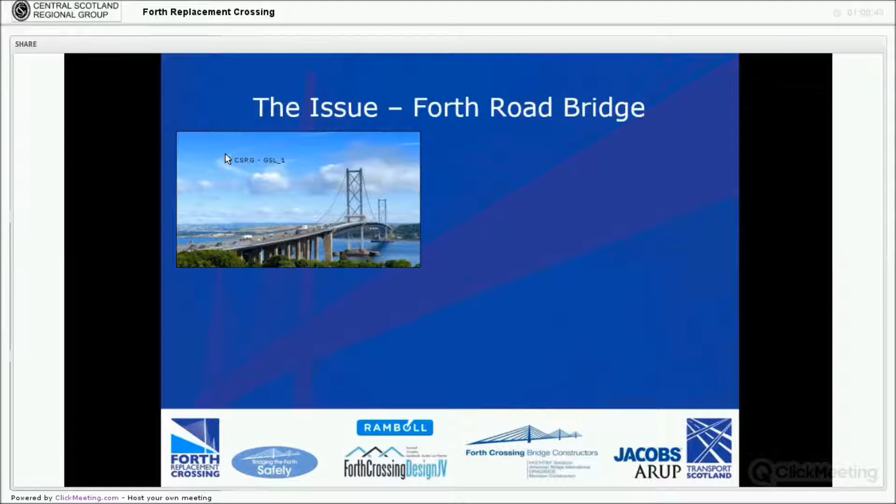To start at the beginning, the existing Forth Road Bridge is 50 years old this year, and there are a lot of celebrations planned. It is currently carrying something like 5 or 6 times the level of traffic that it did when it opened in 1964, and every year the maintenance burden increases.

On top of that, in 2004 to 2005, inspections of the main suspension cables revealed corrosion, leading to a strength loss of up to 10% in those cables. The more pessimistic predictions looked for potential weight restrictions by 2014 and possible closure by 2019. I'm pleased to say that work since then has extended these timescales somewhat, but that lost 10% of strength is never going to be regained.

So, with this situation, the Scottish Government appointed Transport Scotland to look at the feasibility of a replacement crossing. We looked at 5 crossing corridors along the length of the Firth of Forth from Grangemouth to Inverkeithing, and 4 different structure types, both bridges and tunnels. But the preferred option, accepted by the Scottish ministers in December 2007, was for a cable-stayed bridge immediately to the west of the existing Forth Road Bridge. And by the way, the government wants it by the end of 2016, so a very tight timescale.

At this point, Transport Scotland appointed Jacobs Arup to be our technical consultants to bring the scheme through the scheme development phase.

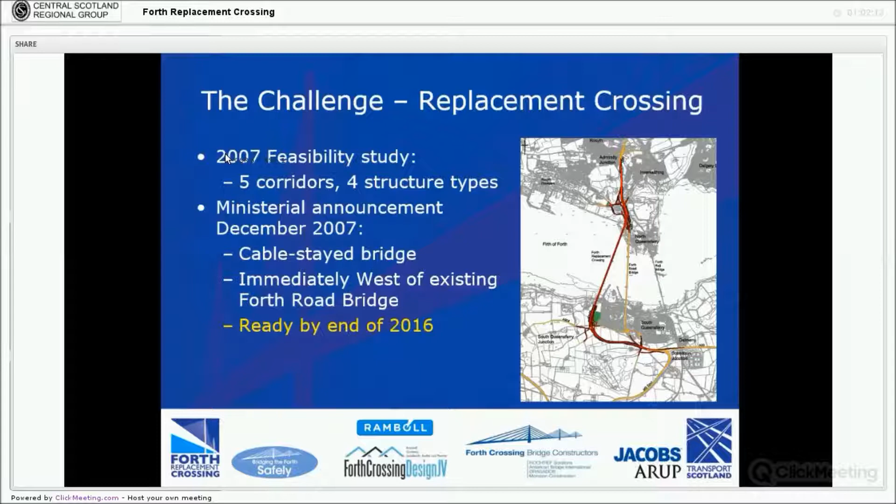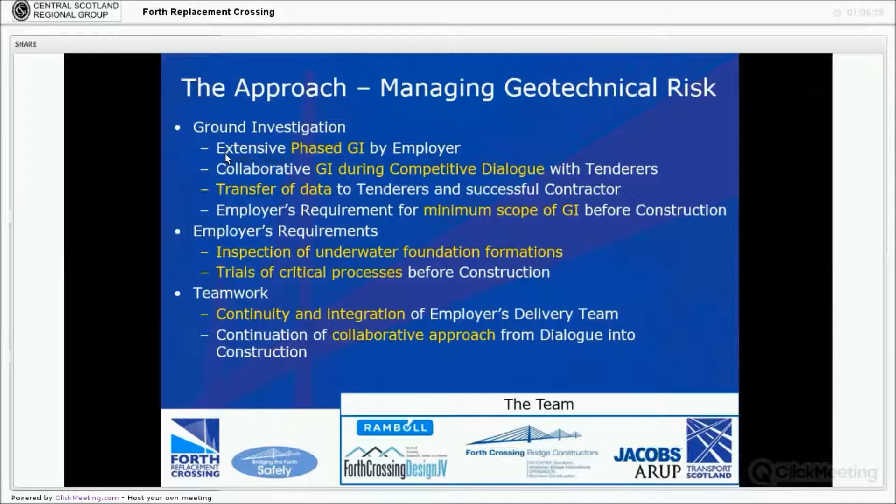So what is the task ahead of the project team? They have to deliver what will be called, when it's opened, the Queensferry Crossing. It's over 2.6 kilometres long, of which over 2 kilometres is cable-stayed bridge.

Some of the challenges facing the construction team are that the spans cross 2 busy shipping channels to Grangemouth and Rosyth. The deepest water at foundation locations is at South Tower, where the water is 20 metres deep. The deepest rock head, also at South Tower, is 40 metres below Ordnance Datum. The tidal range in the Forth is 6 metres, and the tidal current at Central Tower, in the middle here, is 2 metres per second, which is a fair trot.

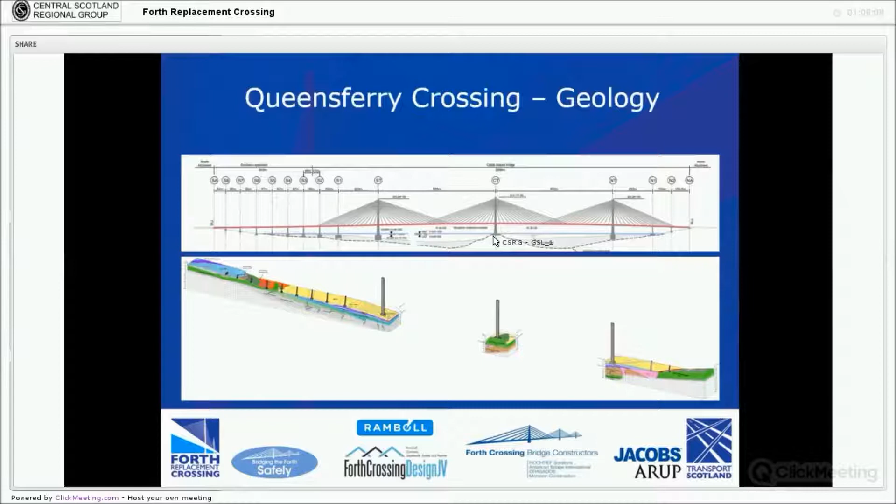I won't go into the geology, John will be describing that shortly. Suffice to say that a combination of the geometry of the bridge and the geology has resulted in a number of approaches to the construction of the foundations.

All the foundations are spread footings onto rock, but they've had to be tackled in different ways. We'll get some more detail about some of these later on in the presentation, but I'll just introduce some of the key

locations for you. The yellow box surrounds the Central Tower foundation, which sits on a tidal island called Beamer Rock between the 2 shipping channels. Flanking that are the north and south towers, plus an additional foundation at Pier S1, which are formed from caissons, large steel cylinders filled with underwater concrete.

The remaining marine foundations are relatively conventional cofferdams, and on land it's relatively straightforward. I'd draw your attention to the column on the right-hand side - 3 of these foundation solutions require the rock formation exposed during construction to be inspected in the wet, underwater. We'll see later on how the contractor has tackled this.

I think at that point, I'll hand over to John to describe the ground investigations on the geology. Thank you, Paul. Okay, move on.

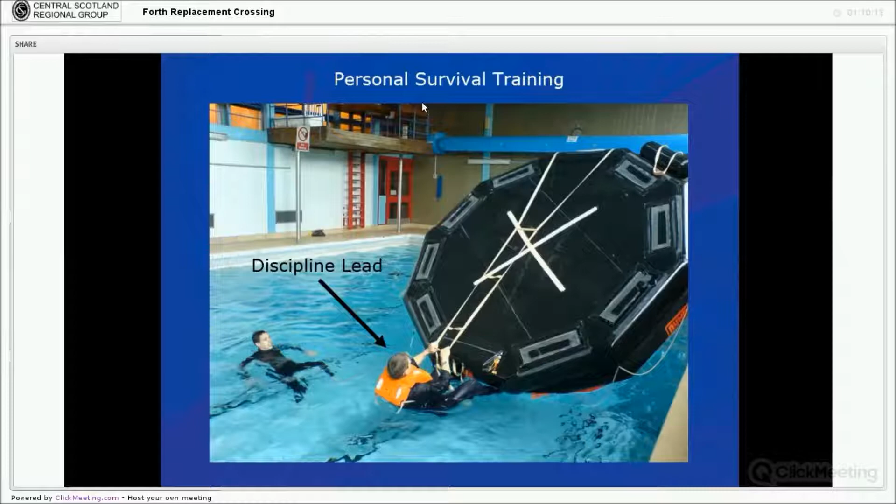The next interesting thing we found was we could swap our site Land Rovers for open-top speedboats. We thought this was quite a good idea, but of course, it being Scotland, it wasn't a good idea on every day.

Paul mentioned there's a 6-metre tidal range here, so in this sort of situation you could find a 9-metre ladder climb to try and access that platform. There are means and ways of getting around such difficult things, but it's a whole subject in itself. It's worth thinking about access when undertaking this sort of work.

One other thing we found was sometimes the simple things trip you up in life. On this platform, the contractor put land-based investigation tools - a cable percussive rig and a rotary rig, operated by standard drilling crews used to measuring borehole depths below ground level. But there's no ground here. So the contractor surveyed the level of the deck and gave them an offset to take off every measurement. It wasn't part of their standard operating procedures, they didn't do it all the time, and as soon as they became distracted or tired, it just went out the window. It was something we had to keep a constant eye on, making sure they were recording the right levels.

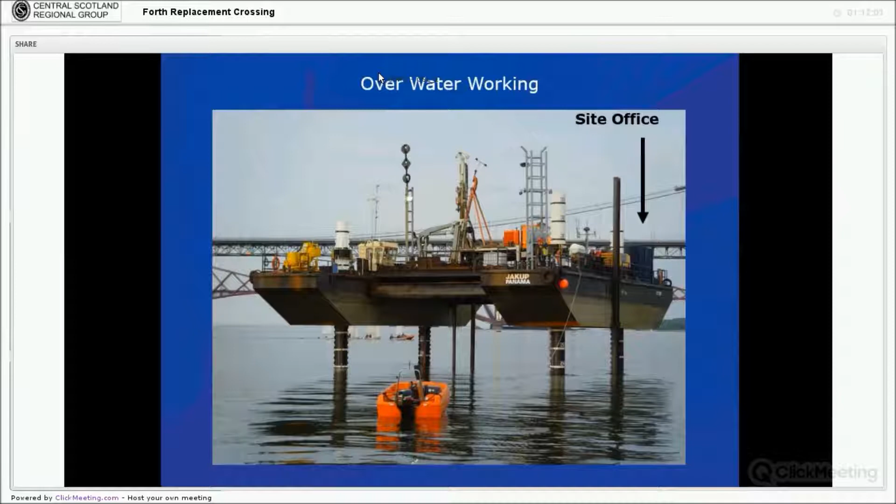As you can see, we've got a cable percussive rig on the left-hand side of this platform, a rotary rig to the right, and all the equipment around about. Again, it's access - it's not possible to get all that equipment on the jack-up when you need it, so it needs to be on before you start. It makes for a very congested workspace, and if you're an engineering geologist or geotechnical engineer trying to supervise, you want to position yourself where you can see what's going on. But it's virtually impossible to find somewhere to stand without being in someone's way at some point.

Again, access restrictions. In the River Forth, we found floating barges and jack-ups struggle to get to shallow water areas, and indeed deep water areas. In shallow areas, you can't float the barge in over it at high tide, so you can't access that area. In very deep areas like the South Tower, you need a jack-up with very long legs, or a floating platform, and keeping that platform steady and stable becomes a whole new problem. At Beamer Rock, we had ground levels at +2 meters OD, just below spring high tide but well above low tide, so there was no option to float a platform in. We had to construct a specially designed platform light enough to lift into place with a multi-cat vessel - an even more constrained and exposed working environment for the drillers.

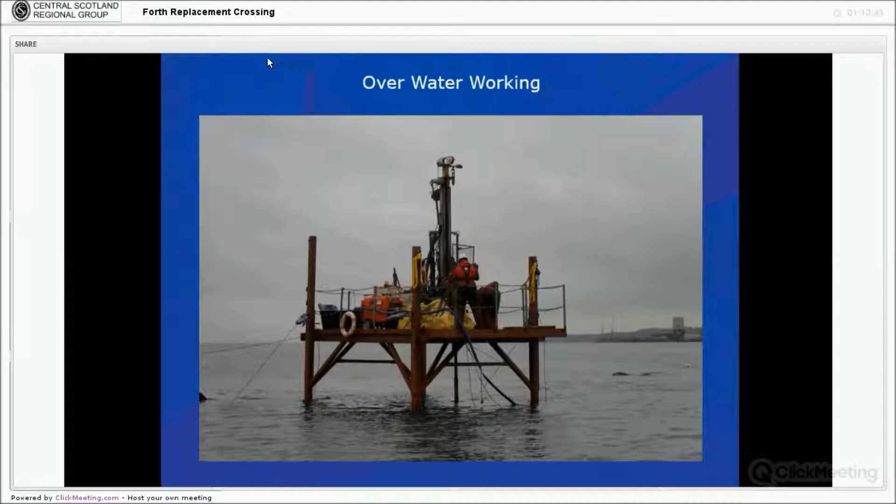Working over water, you're using boats and barges, typically hired in and staffed on a 24-hour basis, so the ground investigation naturally fits into that 24-hour pattern. But it comes with its own challenges. First, lighting was very difficult - you can't have some areas well lit and some in darkness, it's just not safe. So adequate lighting had to be provided, requiring extra generators. It's all a problem.

The next thing was that noise at night was a large issue. Calm sea conditions allowed noise to transfer right across to our local residents, so we had to completely ban cable percussive operations - it was just far too noisy, and even still we were receiving complaints, as Paul will attest to. So we had to address the rotary rig too, and got around that by strapping rubber matting onto anything that moved or vibrated.

Wow, it was sometimes dirty work. Actually, it was quite a clean environment since there's no muddy fields to traipse around in all day. But if the borehole starts throwing up mud, it's so congested it's not really easy to get out of the way of it. You've got to admire this driller for maintaining a positive attitude in this condition.

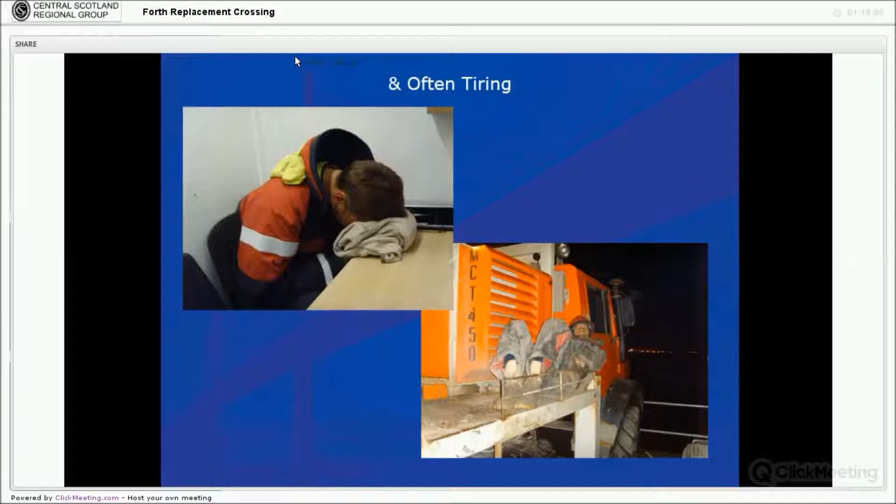Okay, we'll talk a little bit about the geology now.

So we did three phases of ground investigation over three years, and we pulled together some records on the encountered geology. We produced a 3D section to try and represent that, and the next few slides are sections of that zoomed in. The alignment of this section is right along the centre line of the bridge, cutting through the towers and the piers. We've removed any of the foundation details just for clarity.

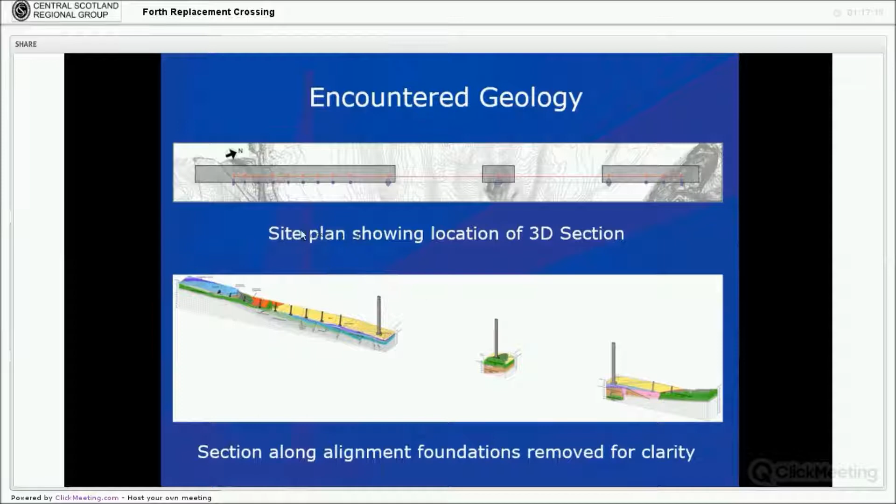Starting on the south side, we can see that we did indeed find the glacial till identified by the light blue colour and the two levels of raised beach deposits. We also found granular fluvial glacial deposits and made ground associated with Port Edgar Barracks, a former naval base. But what we did find was that underneath the south abutment and Pier S8, we didn't have the alkali dolerite subcropping at Rockhead. We actually had Calders member sandstone.

If we move a little further offshore, we can see that this altered dolerite, the alkali dolerite sill, starts to separate into thinner sills. And as it does so, we found that the alkali dolerite became altered. So much so that by the time we get further out into the marine environment, it completely altered to what's known locally as white trap. Iain will be showing some photographs of this rock later on.

The other thing to see here is that we had identified a marker unit between the Calders member and the Hopetown unit, which was the Burdiehouse Limestone. That allowed us to get all of our stratigraphies right. If we had a borehole where we could identify the Burdiehouse Limestone, we knew what was happening with the geology.

The bedrock and all the units are dipping just slightly more than Rockhead towards the north, which meant that we actually found differing formation rocks at every single pier. So we would go from the Calders member sandstone into the Calders member mudstone, then the Burdiehouse Limestone at Pier S4, then the Hopetown mudstone, and then the Hopetown sandstone. So varying geology for every pier. Above the bedrock we have a varying succession of fluvial glacial deposits, glacial till, and a thickness of alluvium, which all increase in depth as we go offshore.

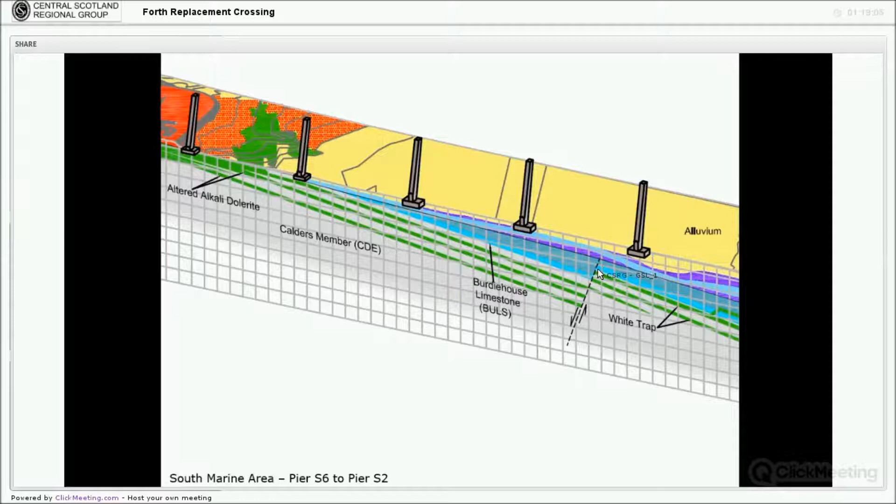However, boreholes here found the rock at around about minus 40 metres OD, and we did a few calculations and worked out that that was adequate. We could form foundations at that depth, and we didn't need to increase the span of the bridge at that point. So we kept the specimen design to a 650 metre crossing, or span.

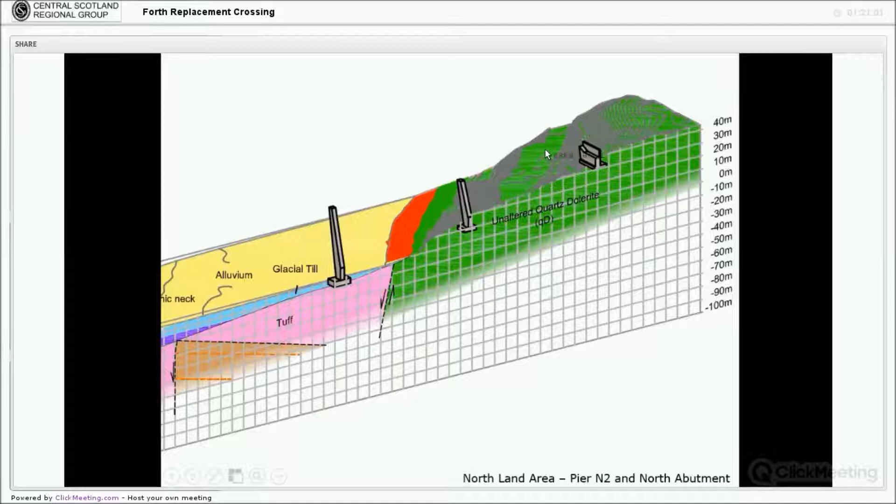When we move on to the North Land, there's a dramatic change in the geology, and we're back into the quartz dolerite sill that we encountered at Central Tower. In 2010, we did also identify a raised beach deposit in this plateau area here. And that's a summary of the geology.

I'll hand over to Iain now. Thank you, John. I'm Iain Bews.

I've been working with Ramboll for about 6.5 years now as a geotechnical engineer, and the last 2.5 of those years I've been fortunate enough to be working on the Queensferry Crossing project, which is obviously an incredible project to work on. My role has been on the designer site representative team as an engineering geologist.

The designer site representatives are comprised of scientists and engineers from various disciplines, and our role is to be the designer's eyes on site. We communicate design issues between the designer and the contractor. We work closely with the contractor in order to help develop construction and inspection methodologies.

We particularly get involved with design issues with temporary works, because we have to be sure that the temporary works are particularly complicated on a project like this. Obviously, large spread footings on bedrock may be complicated on land, but in a marine environment they certainly are complicated, and actually trying to get that foundation in place where it needs to be and ensure that the rock is cleaned and ready to go takes some doing.

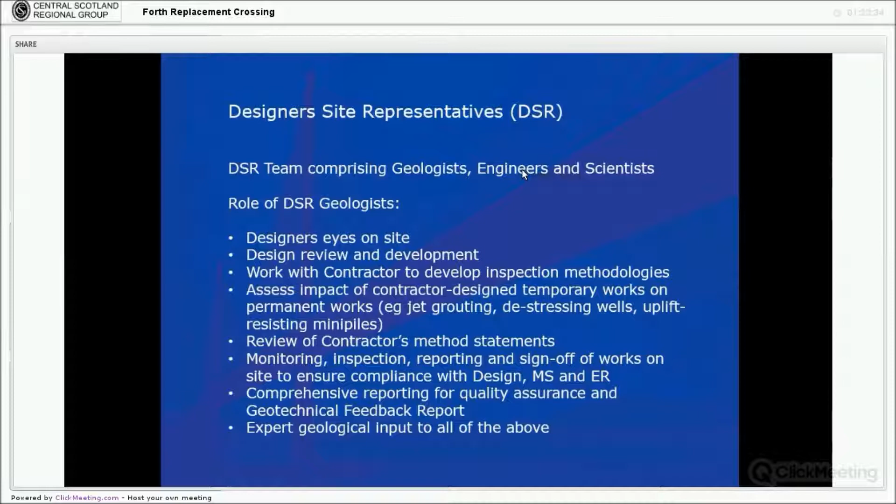I'm going to talk a little bit about the pre-construction marine ground investigation, following on from the earlier talk about the various phases. This was the final phase.

Once the FCBC had been awarded the contract, they realised they needed to do a little bit more ground investigation, just to make sure there weren't any gaps, make sure that we had enough information to verify the design parameters, confirm the rockhead gradients, and of course also to satisfy the employer's requirements.

In particular, there's an employer's requirement that every foundation had to have an investigation point in opposing quadrants of the foundation area, and that those investigation points had to be a minimum of 2 times the foundation width below the underside of the foundation, as per the Eurocode 7 guidance.

So in the case of the South Tower, for example, which is a 30-metre diameter foundation, 40 metres below sea level, that means we have to go 60 metres below that. Hence, we were going down to depths of 100 metres, minus 100 metres below ordnance datum. So those boreholes weren't insignificant, and there was a lot of core to be logged.

It was 24-hour working over 7 days, the same as the other investigations. It took about 7 weeks altogether. There was a fair bit of downtime due to some atrocious weather, as it was conducted between a November to January period 2 years ago, as these GIs often seem to be, and we had some fun out there.

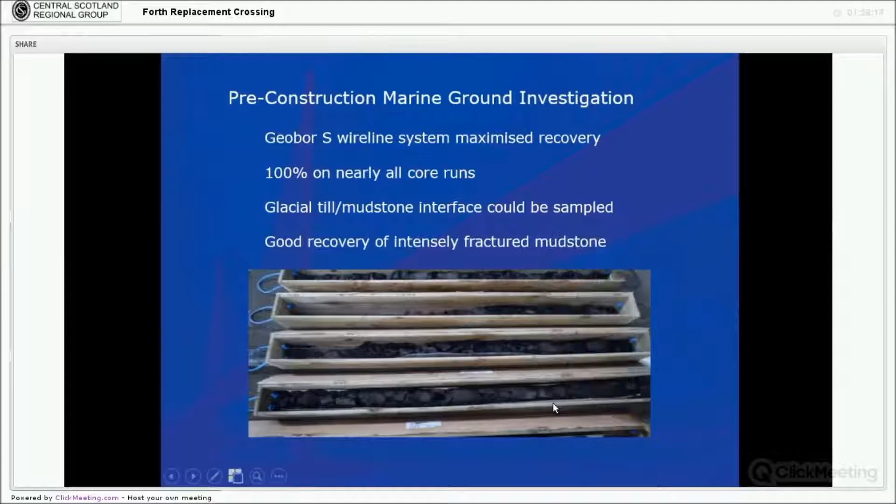Thank you, John. So here's an example of some intensely fractured mudstone. You can see in this core on the right, you can actually pick out the structure of the rock, whereas without Geobor S it would have been almost impossible to recover that. It would have ended up just as a load of loose gravel in a box.

I should also mention that one of the reasons for the marine GI in the pre-construction phase was to get additional information about the fractures, because the fracture geometry obviously has a large influence on the rock mass strength. So rather than just relying on the predominantly UCS and point load tests that had previously been conducted, we did some tests on natural discontinuities, so we were able to ascertain a shear strength along natural discontinuities, which was helpful to verify the assumptions in the design model.

Hi, so as I was introduced earlier, I'm one of the engineering geologists from the design joint venture. One of our main roles on the project was to carry out formation inspection, and it was essential for us to check that the founding rock, once it had been excavated and uncovered as part of the construction process, was consistent with the expectations of the design. So there are a number of key parameters that we had to check, related to the rock bearing strength requirements - we had to check the rock type, the rock strength, the discontinuity spacing and orientation, the condition of those discontinuities, and also check that the overall formation surface roughness was consistent with the design.

So was it rough, was it smooth, was it peaky, was it flat? There's lots of things for us to check. We also had to check that the prepared formation surface was clean - was it free of loose material, was it free of soft material? Because all these things would influence the performance of the foundation. And ultimately, once we carried out our formation inspection, we were able to sign off that formation. We carried out this at each of the foundations.

So, as previously mentioned, we carried out the formation inspection at the locations where the foundations were constructed in the dry, and also where the foundations were constructed in the wet. This just shows you again the locations of each of the foundations.

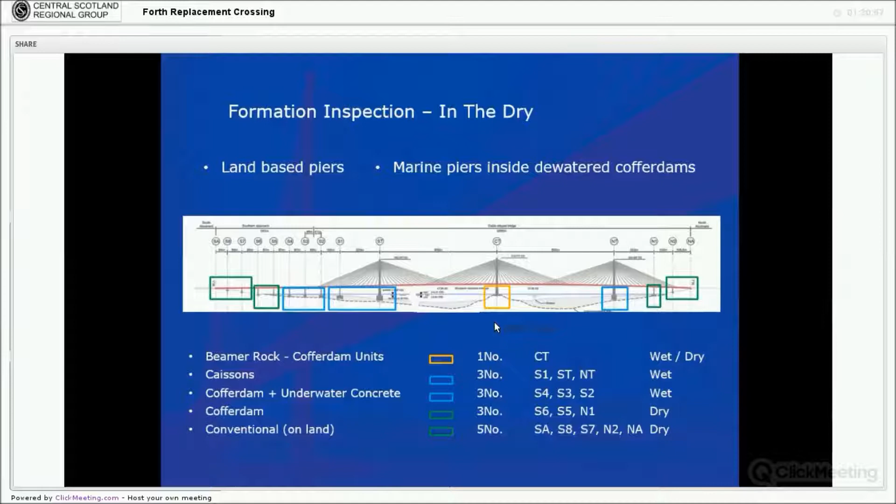You ended up with a very good, clean rock surface we were then able to inspect. Formation inspection in the dry was relatively straightforward. We had full access to the rock surface and were able to carry out direct visual inspection, as well as a scanline survey.

This was a really effective, systematic way of gathering data regarding the actual condition of the founding rock. We laid out a number of inspection lines across the rock surface, and along each line, for every discontinuity that crossed it, we assessed the spacing and condition of those discontinuities.

So were they joints or bedding discontinuities? We also looked at joint infill and general features of the joint, and took orientation data of the joints, comparing all the observations we made to those expected by the design.

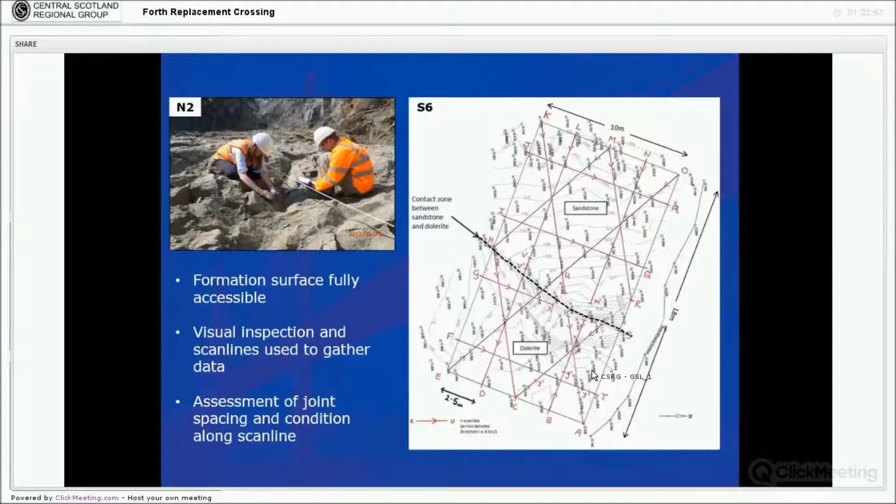And back to Iain for some information about Central Tower and the trials carried out.

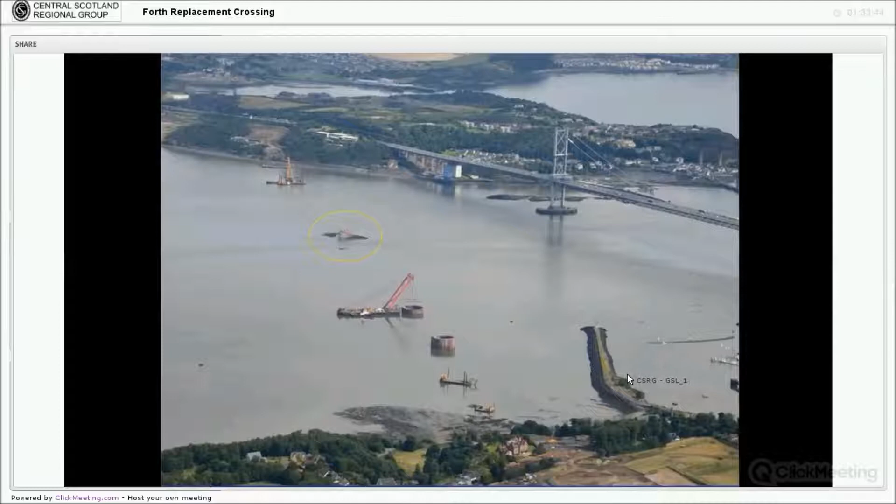There you could see the location of the Central Tower on the Beamer Rock, which you've already seen numerous diagrams showing where the Beamer Rock is in the centre of the Forth. And there it is in all its glory before it was blasted and excavated out, which I'll describe in a minute. That's the lighthouse, which obviously was dismantled.

The reason for the trench is that L-shaped cofferdam units were prefabricated close by in Rosyth and were moved into place by crane to form a watertight cofferdam so that the main foundation could be constructed in the dry.

Now, the majority of our geological involvement was in developing the methodology for inspecting those edges, because they could only be inspected underwater, since it was in subtidal conditions and there was no cofferdam at that time.

So, okay, I'll move on.

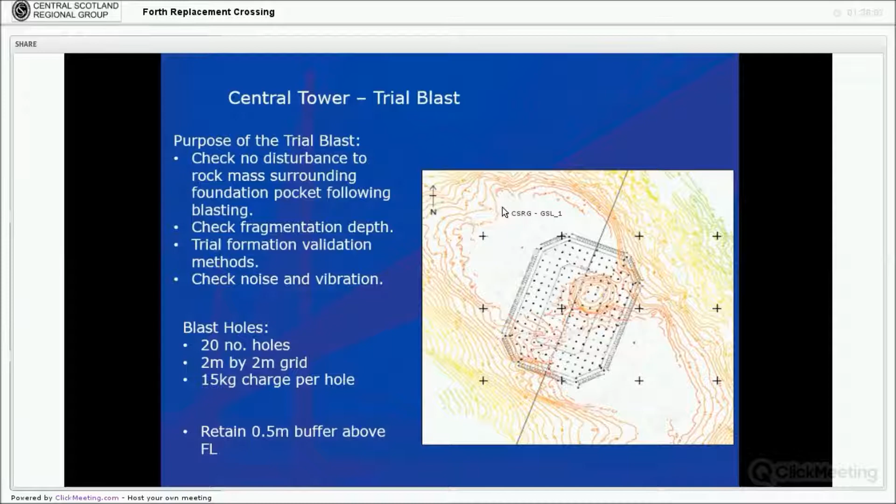Okay, that was the trial blast. Not perhaps, it would have been nice to have seen that building flying up in the air, wouldn't it? But it wasn't. It was quite good at the time.

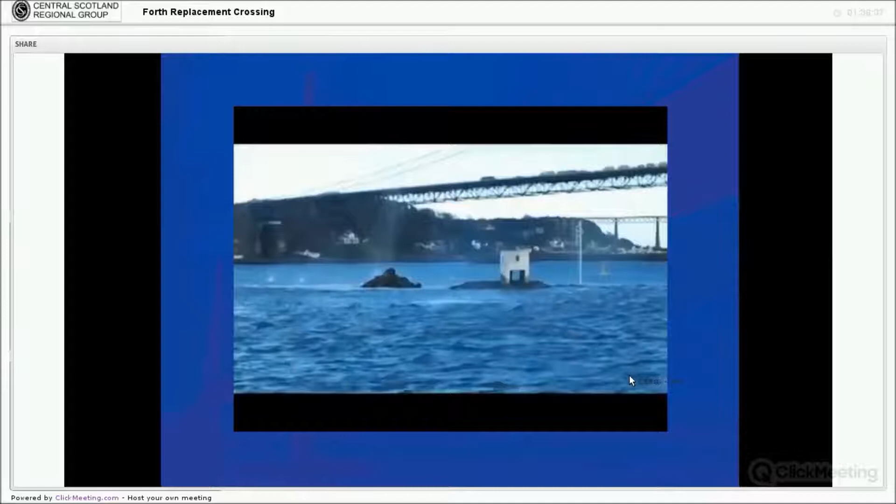Yes, so this is what was in place afterwards, following the blast. Detailed topographical measurements were taken of the pit and the extent of the blasting.

In the foreground, you could see that the shoulder of the pit there was damaged a little bit more than was anticipated. It was only a very thin shoulder, which caused a few issues with our proposed inspection.

Now we proposed to inspect the blast pit by a series of scan lines, similar to what Jenny described as we did on land. But due to the water getting in over that shoulder area at anything except the very lowest tide, and also the way the blasted material was excavated, some of the material got washed back into the pit at high tide.

It was very difficult to get it completely cleaned out. Those factors meant it wasn't really safe or possible for us to do these scan lines to the extent that we required.

So we took the measurements that we could. You could see there that once the blasted material had been cleaned out by machine, you could see how it naturally broke back to the subvertical joint surfaces in the dolerite, and immediately beyond those the rock was solid with no signs of damage. That was quite good - the blast area was quite well contained in that respect.

Now, because the scan lines couldn't be conducted thoroughly, we developed another methodology for formation, and we did that by bedrock coring.

So another jack-up. This time we did manage to get the jack-up floated over the beam of rock at high tide. It was an operation conducted at night, with it being nudged into place by another barge. Really a real testament to the skill of the barge masters concerned that they managed to get that jack-up rig in position centrally over the pit at night without being able to see anything, certainly not being able to see the rock because it was all underwater.

Needless to say, it was a 24/7 operation over about 3 days. The moves could only be conducted on a very high tide, and at this particular time, the central tower was on the critical path for this project. There'd been a lot of delays due to bad weather and other factors, and at this particular time, we really needed to get in and get it done.

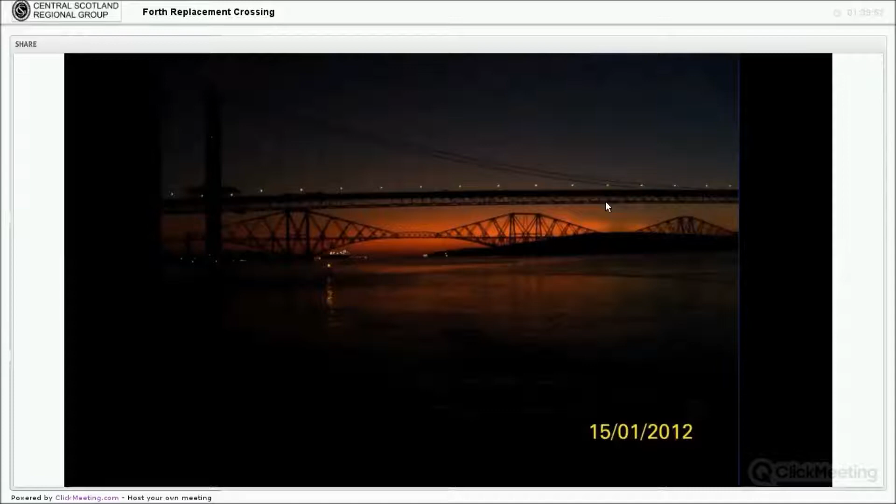So it was done fairly intensively over a short period of time. There are some advantages for the beleaguered geologist who has to go out at all hours of the night and day - you get to see sunrise over the Forth in the middle of winter, which is quite special.

We did downhole geophysical logging in order to assess the naturally occurring fractures as opposed to drilling-induced fractures, because when logging core, you can obviously try to determine which is which, and if you're experienced, you can probably do it quite well, but there's always a bit of a question mark, and this sort of helps to reduce or eliminate that question mark.

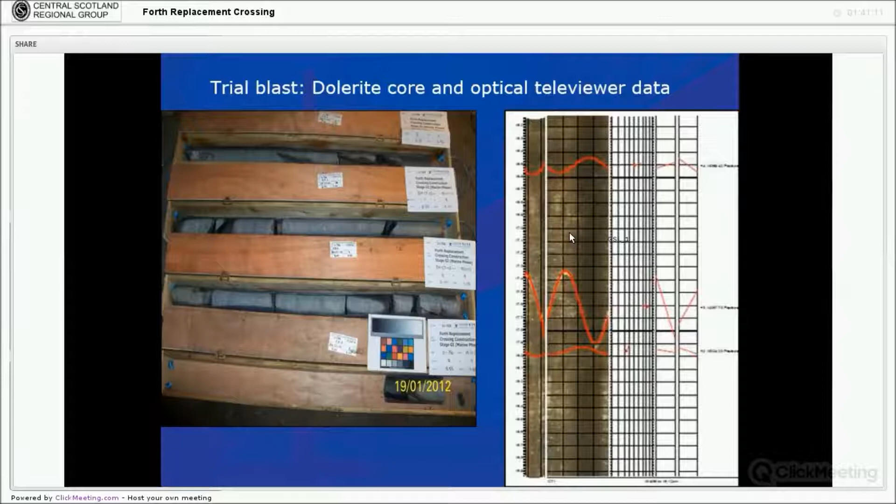These are the results. We logged the core, we estimated what we thought were the natural discontinuities, and there was an interpretation made of the televiewer data, and there was a fairly good correlation between the two. So we were happy that the two methods in a way validated each other, and we felt that we gained confidence that there wasn't any damage at the proposed formation level.

The damage resulting from the blast was very shallow, maybe 100 mil, something like that. It was certainly within the buffer zone. So, in fact, as a result of this trial, we reduced the buffer zone because we were confident that the depth of blast damage was minimal.

Following that exercise, the remaining 3 production blasts were carried out, which completed the area of the central tower foundation.

Okay, so excavation of the central tower. Firstly, blasting, as I've just described. Secondly, excavation of the blasted material. The machines used for this process were all GPS equipped, so it was possible for the drivers to see exactly what depth and what level they were excavating to, which is how the tight tolerances, in the order of 15 to 20 centimetres, something like that, were achieved.

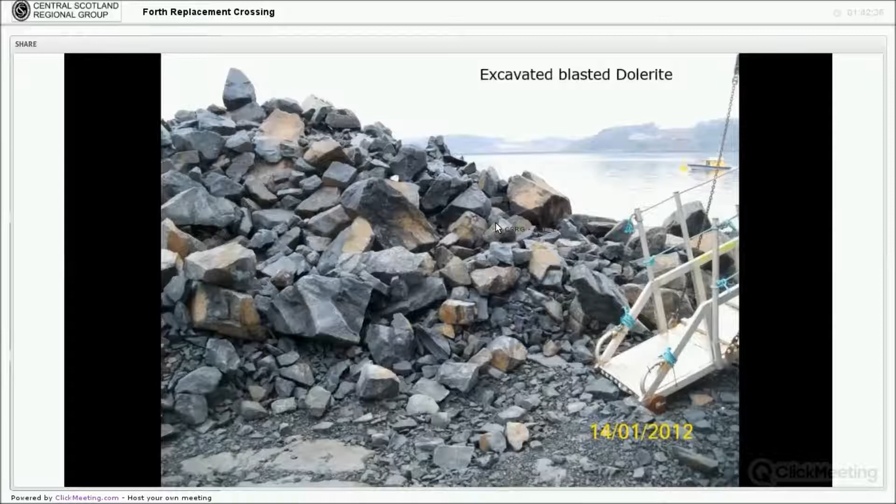That's what the dolerite looked like when it had been excavated and put in a pile. Most of the material was put on barges and taken away to be reused elsewhere on the site. Obviously it's very good stone - it would have been a shame to waste it.

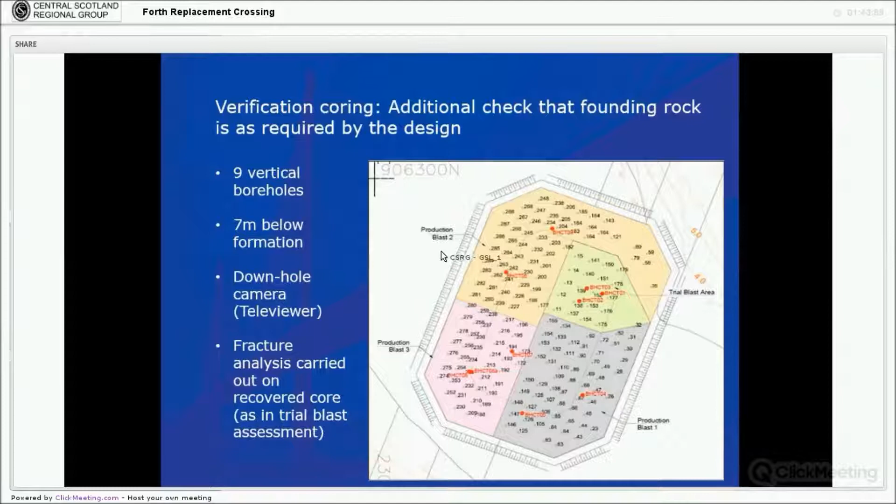Once the excavation had been completed, we had to inspect it. It was inspected initially by vertical coring - we did 9 boreholes to 7 meters below the formation. Again we used a televiewer and analysed the fractures from the televiewer and core logs, and the results proved to be satisfactory. That was a good verification that all the blasting hadn't done any damage to the formation.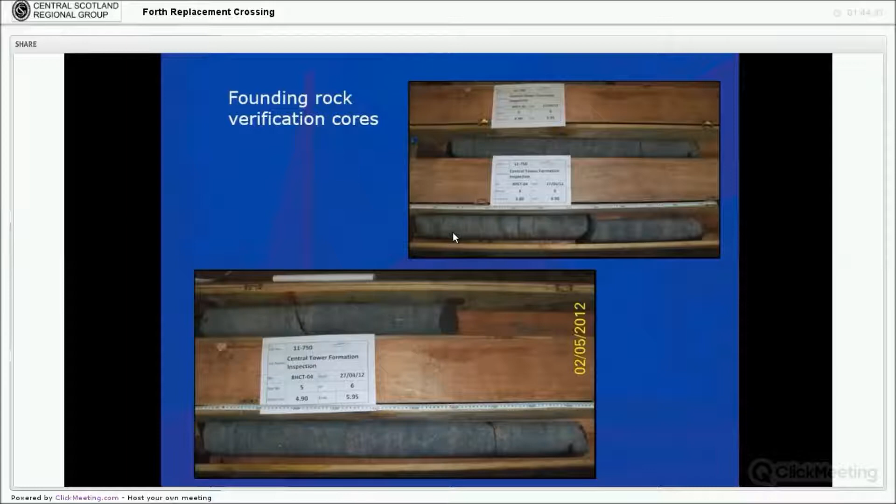Following on from the coring, we inspected the formation using divers. There were two sets of criteria we were hoping to prove, all required by the geotechnical design: the geological criteria and the cleanliness criteria. Geological criteria were, as Jenny has already described, with regard to fracture spacing and surface roughness, etc. The cleanliness criteria were making sure there was no loose, damaged, fractured material - that everything on that formation was solid and intact, so that when the concrete was poured, it was binding to proper intact rock, and everybody was happy that contact would be effective throughout.

The trench area below the cofferdam units - you may recall I said that trench area around the edge where the cofferdam units had to be lowered down on - there was no way of inspecting that in the dry, hence the divers. So, a comprehensive geological survey, followed by a cleanliness survey before each cofferdam was lowered, and then a final cleanliness check using a camera on a stick, which I'll show you a picture of in a minute, before the concrete was poured.

The comprehensive diver geological survey was done on a series of lines, swimming backwards and forwards. The divers came up with a great system, using jackstay lines and levelling staffs, and were able to set out very accurate swim lines done at half-metre spacings. The spacing and time taken depended on visibility - sometimes it was poor and the survey almost ground to a halt, other times we made great progress. The whole procedure took many weeks, but it had to be done, and at the end everybody was 100% satisfied with that formation.

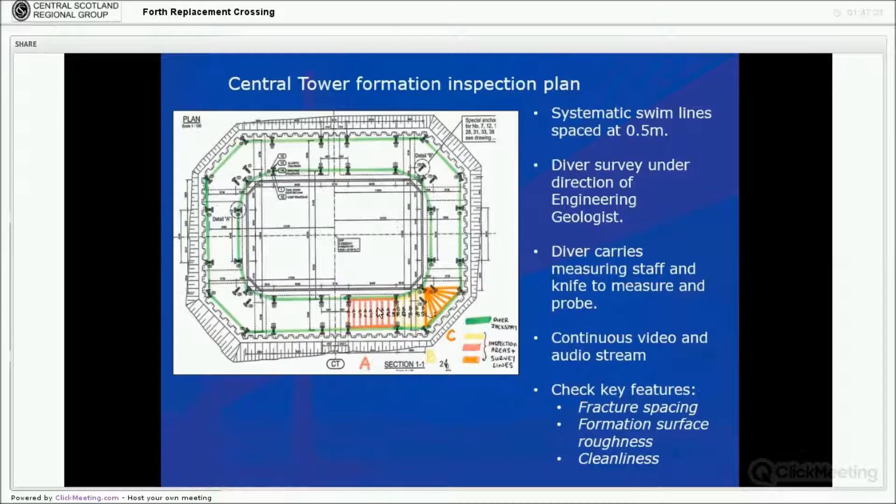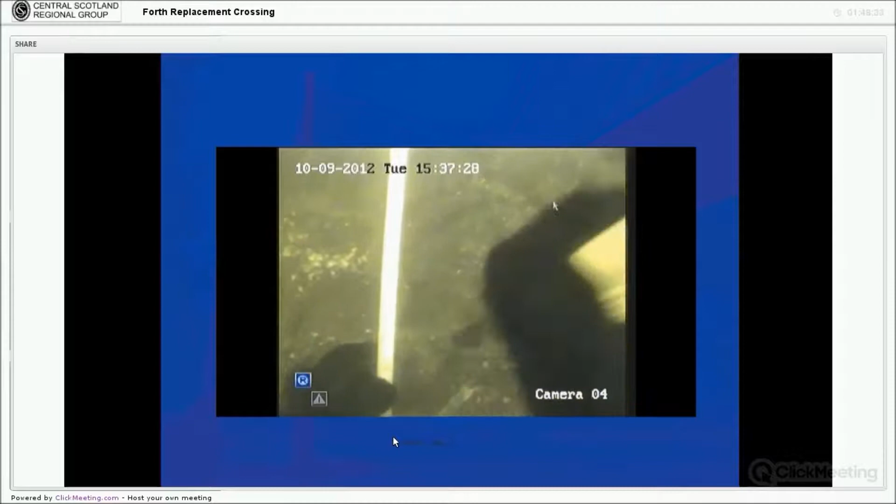This is a video typical of what we could see. There, the diver is measuring - he would put the staff along, and then measure at regular intervals from the staff the offset of any fractures and the width of fractures, and have a good old poke around with his knife.

Okay, and these are a couple of stills taken from the video. You can see the excavation marks on the rock there, and you can see the relief picking up some fractures in the rock. It always looks better in real time than it does on stills, but it's worth taking them.

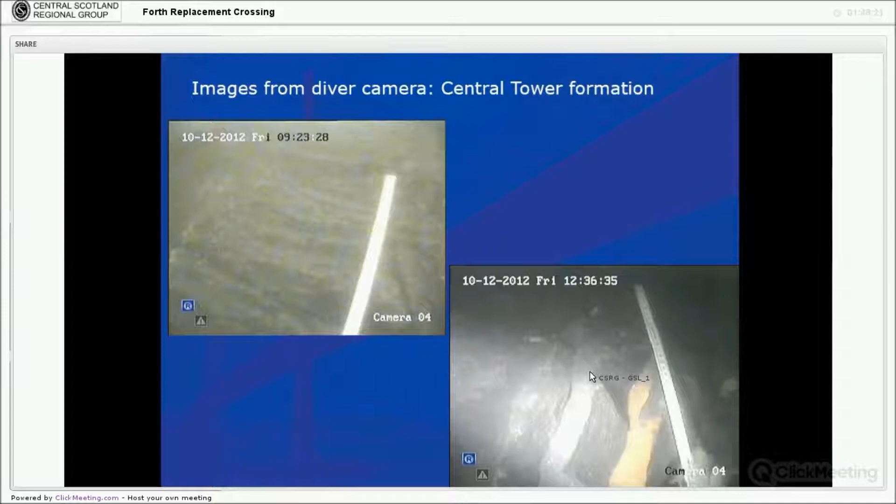They certainly look good in reports. It helps bring it to life so that everybody else concerned who wasn't actually there at the time can look at our monitoring reports and see that, yeah, we're happy, that looks good.

This had to be done immediately before the concrete was poured, just because the cofferdam units, once they'd been put in place, were supported by trench flaps and grout bags around them to make sure no dirt or debris could get in underneath or be washed in with the tides. The surface was completely clean when those units were placed, so this was just a final check immediately before the concrete was poured.

That was a high resolution camera - we could literally see grains of sand with it. You'd be showing the video to someone and they'd say, oh, there's bits of gravel there, and you'd say, no, that's sand. You could almost have eaten your dinner off that formation had it not been underwater. It was a very high standard of cleanliness.

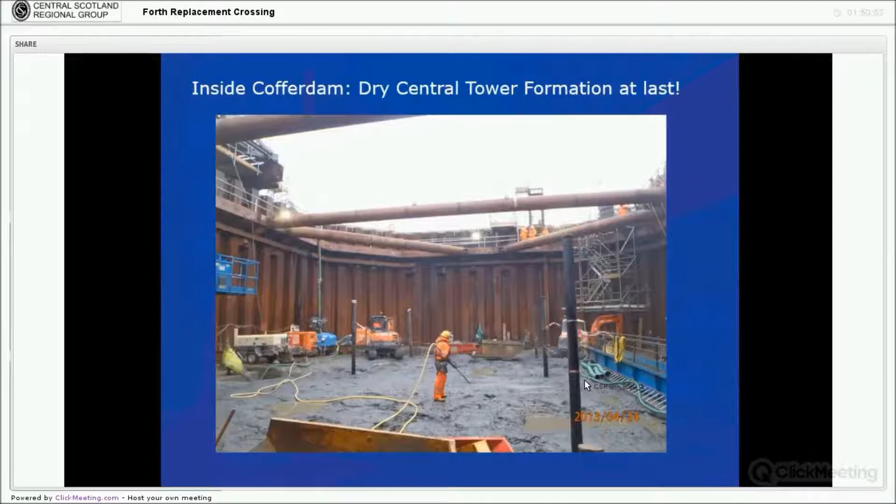You could see there being cleaned with an air lance, and the rock's starting to come through. Jenny and our other colleague Lauren, who we haven't mentioned yet but was also a geologist with us on site, are doing a scan line as they would on land.

And that's it from me. Over to Jenny now to talk about the caissons.

So the caissons were a whole different ballgame, really. The three caisson foundations used on the project were North Tower, South Tower and Pier S1.

Essentially the caissons were large cylindrical open-ended structures comprising a series of steel plates that were welded together. At the base of the caisson there was a cutting shoe, which is slightly pointed, used to actually cut through into the soil.

The internal diameter of the caissons were either 24, 29 or 30 metres, depending on which tower or pier you were at. And there was a double wall on the caisson, with either 1 metre or 2 metres between the internal and external wall.

So these caissons were used at the deepest waters, and the deepest rock head, as mentioned previously, was at South Tower, and that was minus 40 metres, or over minus 40 metres. So it's deep stuff - this is where the caissons were used.

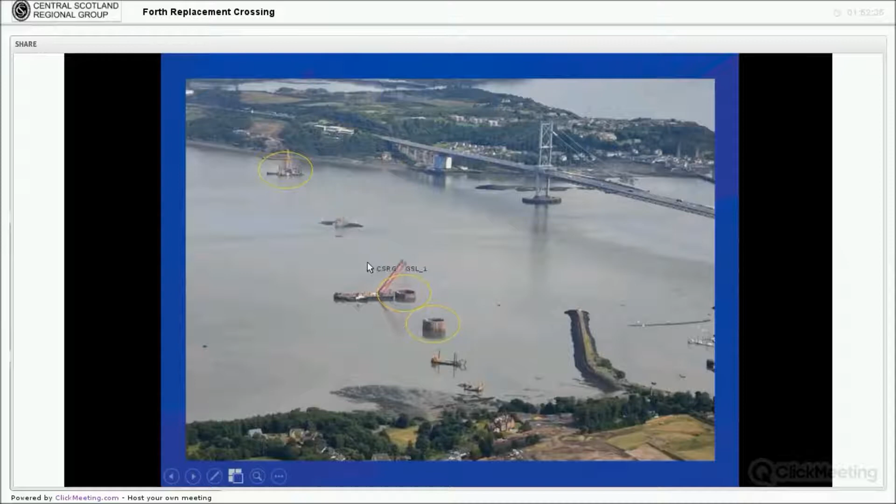So a little bit about the actual installation process. The caissons were brought out into position using a large floating crane, and they were lowered down onto the seabed.

The caissons were then sunk through the superficial materials using a combination of ballasting and targeted excavation. So you can see a grab there that would be used to excavate the material from inside the caisson, particularly around the cutting shoe of the caisson.

As the material was removed around the cutting shoe, the caisson was able to sink down through the superficial material. As John mentioned earlier, the superficial material comprised alluvium over glacial deposits - fluvio-glacial material, which was the granular material, and glacial till, which was the cohesive material. Part of the sinking process was ballasting, so concrete was poured in between the internal and external walls of the caisson.

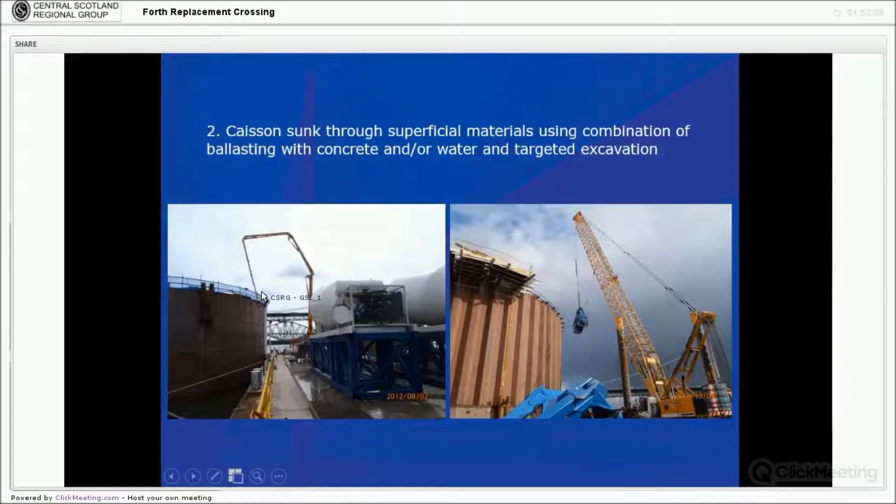Throughout the sinking process, as the caisson got lower into the superficial material, a temporary caisson was installed on top, and this was to prevent waves from overtopping into the caisson at a later date once the caisson had been dewatered.

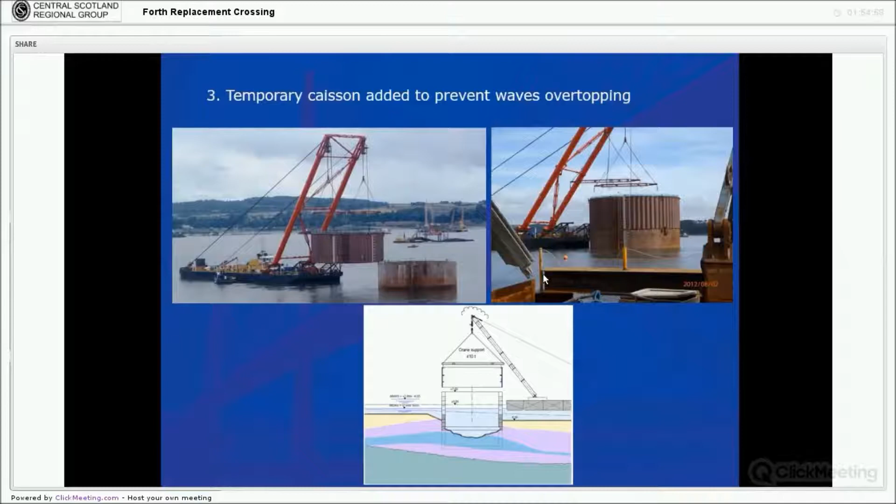Throughout the sinking process, there was continued monitoring of the planned position of the caisson, the tilt of the caisson, and the level of the caisson. FCBC engineers, the contractor engineers, were monitoring real live data that was being brought in from the survey works.

Once the caisson was near the rock surface, jet grout columns were installed around the bottom of the caisson, and these were a key part of the caisson foundation construction. They were essential in sealing the gap between the base of the caisson, the caisson cutting shoe, and the sloping rock head.

Once they were in position, it was possible to carry out the final excavation down to rock head level using the grab and the airlift system. Essentially, the airlift was like a giant underwater vacuum cleaner. It just sucked out all the small bits that the excavator or the grab couldn't reach, and it cleaned the rock surface really nicely. Once that was cleaned, we were able to get in there and inspect it.

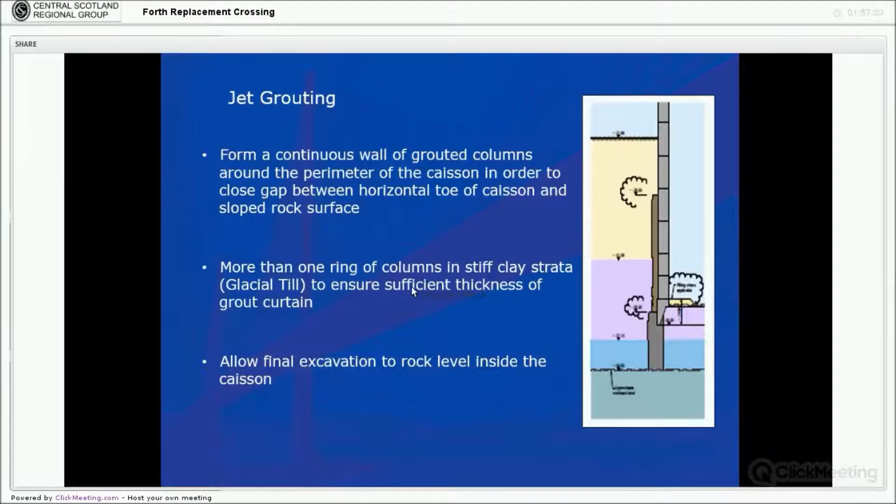The process essentially involves drilling through the seabed until rockhead is reached, and then the rotating drill head starts to inject cement grout at high pressure into the soil. This effectively cuts through the soil, and as the drill head is withdrawn up towards the surface, a jet grout column is formed. It's essentially a kind of soil-crete type mixture, because the soil within the local area of the drill head, some of it's incorporated into the actual grout. So some boulders, some cobbles are actually incorporated into the grout and get encapsulated. That's how you form a jet grout column.

As I said, it's a key part of the caisson foundation construction, and without it, it would not be possible to dewater that caisson. So it's essential that we carried out trials to ensure that the procedure worked out on the river.

The purpose of the trial was to define the jet grouting parameters that were required to make a jet grout column of a certain diameter. There was a temporary works design for the jet grout columns, with a certain diameter required, and a certain strength of grout required to hold back the soil at the base of the caissons to allow that final excavation down to rockhead.

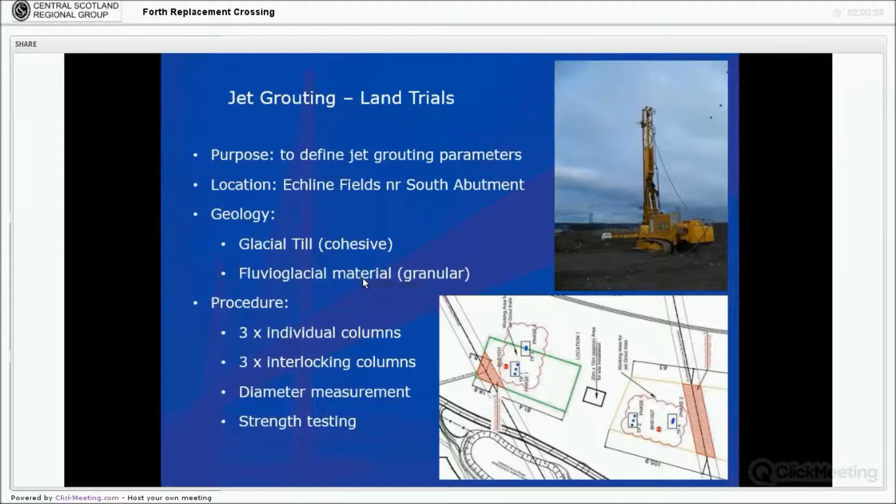The next phase was to drill 3 interlocking columns. Again, these were exhumed and their diameters measured. Strength testing was also carried out on the soil-crete type material. I'll show you some pictures of those now.

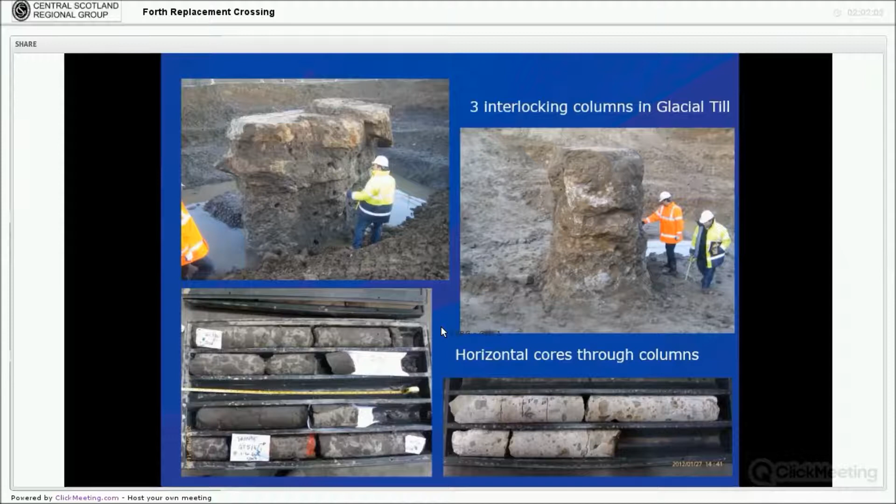This is a picture of the interlocking columns. To test the strength of this material, horizontal cores were drilled through the columns to check there was sufficient strength as required by the design for the jet grouting works, and also sufficient interlock between each column. Essentially, the contractor wanted to prove he could form a continuous wall of grout around the base of the caissons in order to hold the material on the outside of the caissons out.

During the actual construction works, there were a total of 65 columns drilled at North Tower in a ring, at South Tower there were 184 columns formed, and at PRS1 there were 74 columns formed.

In the glacial till, because it was a stiffer type material, narrower columns were achieved, so it was necessary to have 2 rows of columns in order to form a sufficient thickness of grout to hold the soil out.

The location and verticality of the columns were surveyed and plotted in AutoCAD, and where it was shown that there was a gap between 2 adjacent columns, an extra column was drilled to ensure a continuous wall of grout.

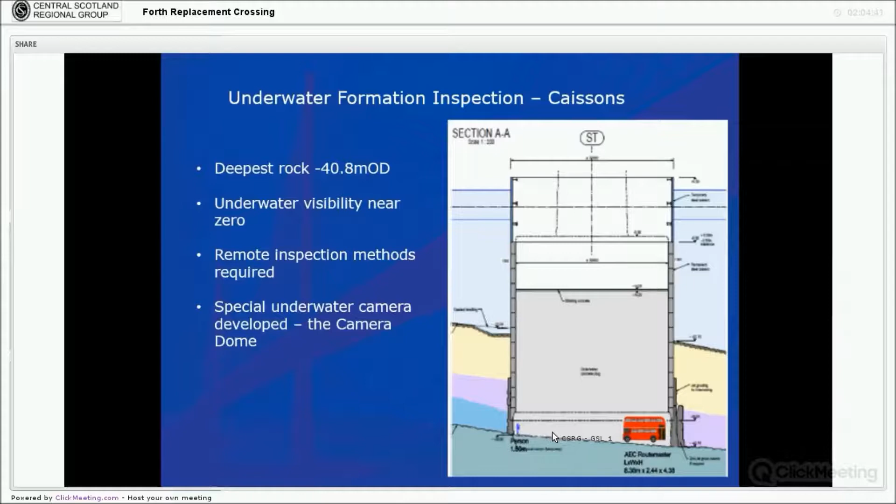As with the jet grouting and the trial blast, this underwent trials, and it also underwent a lot of modification. The early camera dome was a metal open-bottomed box with a camera and a light at the top, and this was lowered down onto the rock surface with fresh water flushed through from the top in the hope that we'd be able to see the rock surface. Unfortunately, it wasn't very effective at keeping the dirty water out, so it wasn't really satisfactory as an inspection tool.

So the next camera dome, a little bit smaller, but it was more effective. It was basically a perspex box filled with fresh, clean water, with the camera inside the box and a light as well. This was again lowered down to the rock surface. There were jets around the bottom, and these jets effectively flushed away any silt or any very fine loose material like gravel or bits of sand from the rock surface. The principle of a sealed box with fresh clean water worked.

However, the size of the area of rock we were actually seeing was not sufficient for us to be confident - we just weren't seeing enough rock really.

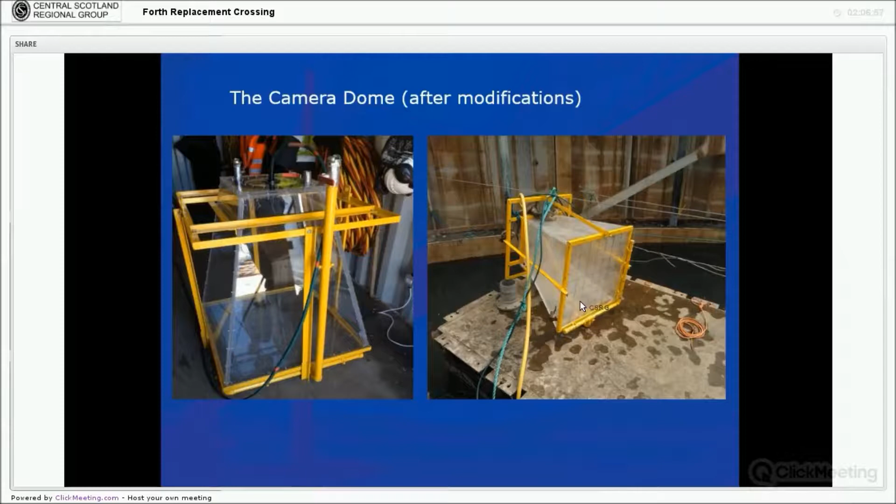So it was lowered onto the rock surface at inspection points on 2 by 2 metre grids, and we were able to view the rock and make observations regarding the parameters I mentioned earlier - fracture spacing, fracture aperture and things like that. We were also able to make an assessment of the cleanliness.

We did manage to supplement the camera dome survey with diver survey. However, divers were only really allowed down there for say 15-20 minutes. So it was really a case of the diver going down and trying to give us a general overview of the formation surface. But if we were unsure of anything we saw through the camera dome, we were able to send the diver down - he'd be able to poke it, or even bring back a sample. So as a combined tool, it was really effective at gathering the information we needed to sign off the rock.

The positioning of the camera dome utilised numbers and letters labelled around the edge of the caisson, and then we used wires going across the caisson to help us locate the camera dome.

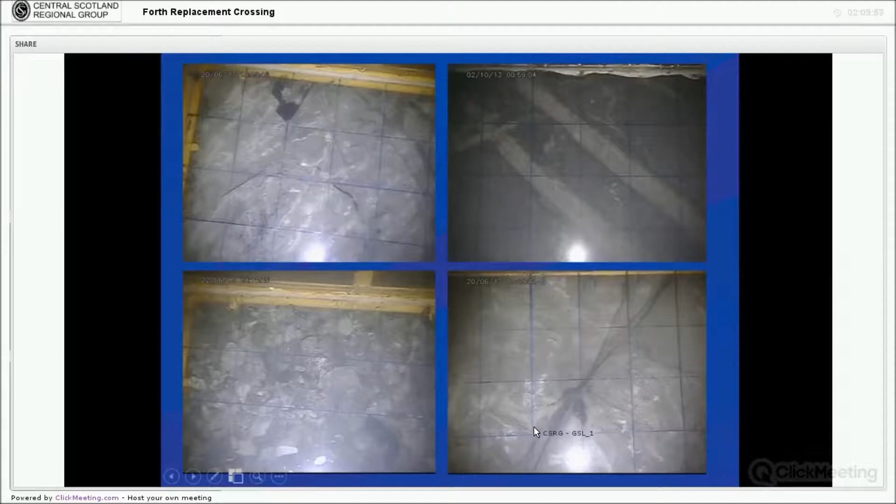The bottom left, it's clear that material is loose, so we're able to say this particular spot needs cleaning. We're not able to see the rock here, so it needs re-inspection at a later date. The squares on the bottom of the camera dome are 100 mm across, so we're able to measure things like fracture spacing and fracture aperture.

In terms of data collection, we spent many happy hours in the dive barge, working 24 hours, often 12-hour shifts looking at this screen. We were able to move the camera around by 360 degrees, so we could really inspect any feature we wanted, and we were able to zoom in as well, which was a really good tool.

We would record all our data on these sheets, drawing what we saw, measuring fracture spacing, and measuring the percentage that was unclean, or the size of any loose material, maybe the odd isolated gravel we found on the rock surface. So again, it was really comprehensive data collection.

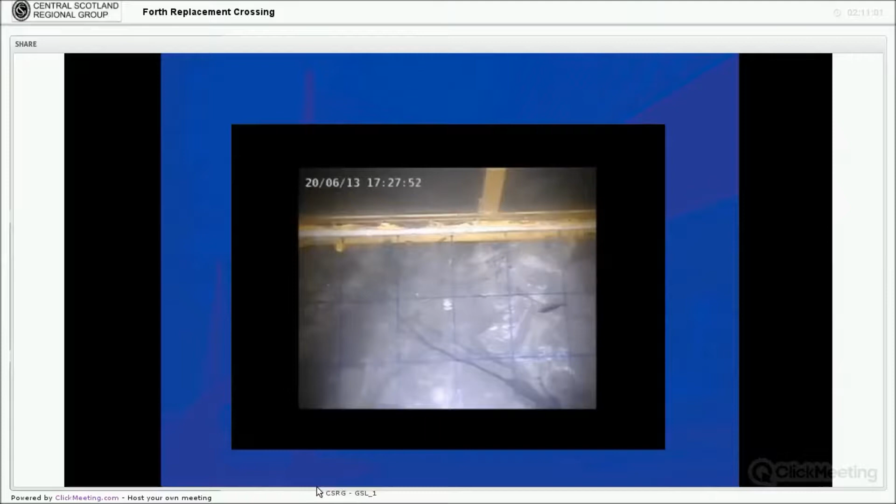This is just a little video of what we looked at. You can see the water is very clear inside the camera dome, and we're able to move the camera around as required. Different situations here from Central Tower, but a very effective tool at gathering the information we needed to carry out our formation inspection and sign off the rock.

So over to John, just for a quick roundup.

Thank you, Jenny. We're running on with time, so I'll try and get through this quickly. A little progress update: in the last year on the project, we've seen some really dramatic steps forward. A lot of our work has been underwater and people don't see it, but now we're really seeing some visible signs of progress and some key milestones being met.

We've made a little video of the last year's progress, which can be seen at this YouTube link, although you can just find it if you search for Forth Replacement Crossing. I'll try and play the video if the technology allows during the question and answer session, but I've got a few images to give you an idea of where we are currently.

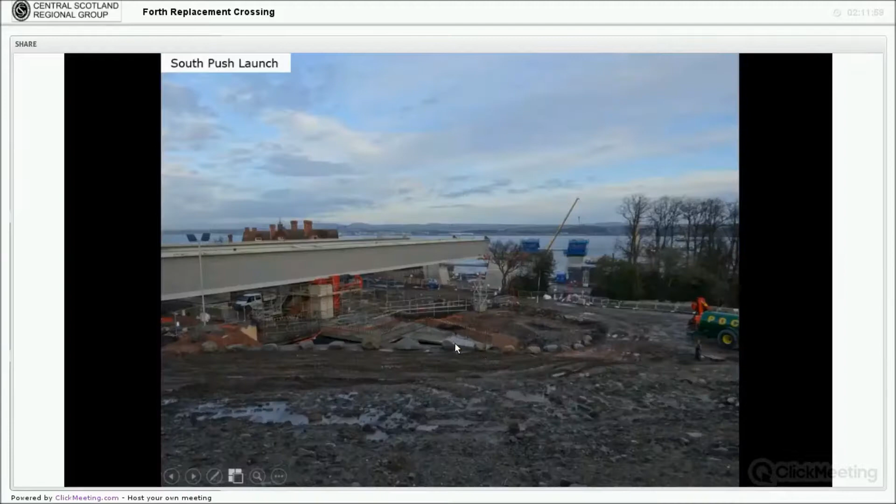On the south side of the river, we have the deck sections. Both north and south carriageways are now being pushed northwards. What we can see here is the south abutment bearing piers, and we're moving very close to pier S8, the first pier. Both carriageways will continue to be pushed northwards as more sections are brought in and welded on to the rear.

The first couple of piers are well underway, at an advanced stage of construction, just as well because we're pushing the deck out towards them.

An image now of the South Marine area. You can see the deck and the first few piers. The piers are actually being constructed in pairs, so the next two piers will come out of piers S6 and S5, which are accessed via a causeway. We then have a barge in between S5 and S4. The cofferdam at S4 has been installed, the underwater concrete plug has been poured, and we're about to start commencement of the reinforced concrete foundation.

At Pier S3 we've installed the frames for the cofferdam, and we're anticipating that the sheet piling operation will commence this week. There's a gap between Pier S3 and Pier S1 because we've not started S2 yet. S1 is the cofferdam caisson, the first caisson we've been talking about. Hopefully we'll see that dewatered shortly, so we can start construction of the reinforced concrete foundation there.

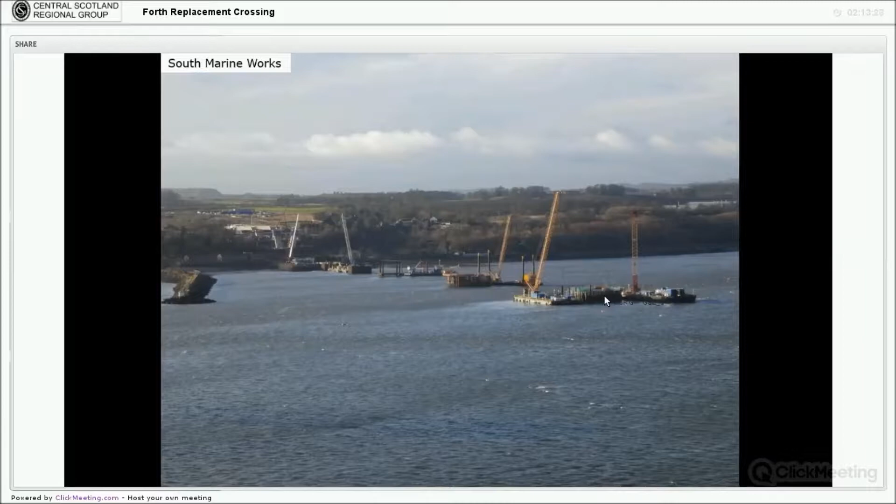At the south tower, things are a little more advanced. We've poured the underwater concrete plug, constructed the reinforced concrete foundation, and we're on the second lift of the tower. Although we can't see it yet because it's not above the top of the caisson, it will be shortly.

Central tower, things are looking a bit more business-like. We've got the cofferdam installed, and you can clearly see the jump form in place with the rebar for the next lift being put in place and the concrete already poured underneath. This jump form has now lifted up to that level. It's on the 5th lift today.

North Tower is a very similar situation to South Tower. It is well underway, but we can't yet see the progress. And Pier N1, the cofferdam has been installed. It's still full of water, but we're hoping to dewater it shortly.

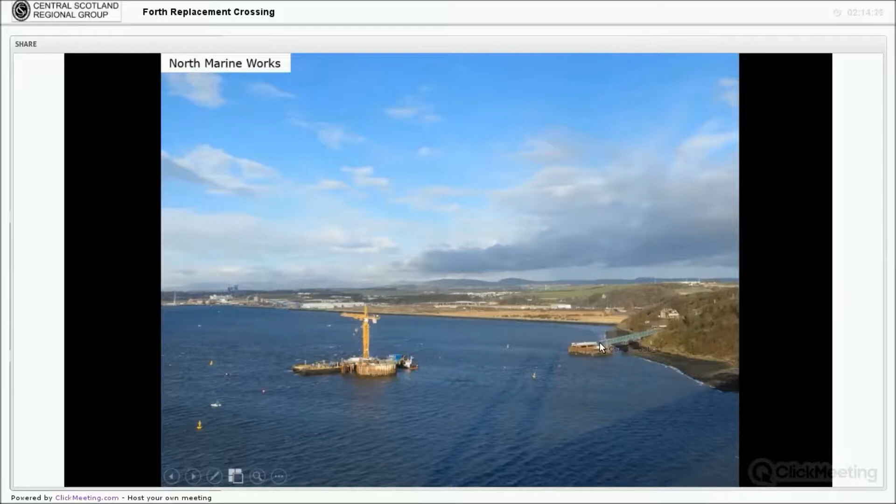And the North Land is well underway as well. The foundation for Pier N2 is constructed, and you can see here the north abutment is in an advanced stage of construction.

I just wanted to say that when we were planning this presentation, there were four geologists talking about this project, but there's been an awful lot more geologists involved. We're not trying to steal the limelight, but I wanted to put a list together and give credit where credit was due. I realised just how many people have been involved. 85 geologists have been involved in this project over the time I've been involved, and that's just the number that I know of.

Geologists don't build bridges on their own. There are a lot of other disciplines involved, and of course we work very closely with geotechnical engineers as usual, and there's a lot of other civil engineers, structural engineers, ecological and environmental specialists, health and safety people, transport planners. The list of disciplines just goes on and on. Working with all these different disciplines and learning all the time has been one of the things that's made this project so enjoyable for me.

We're now at the end. But there, I will just go on to the next one. This is that presentation I was talking about.

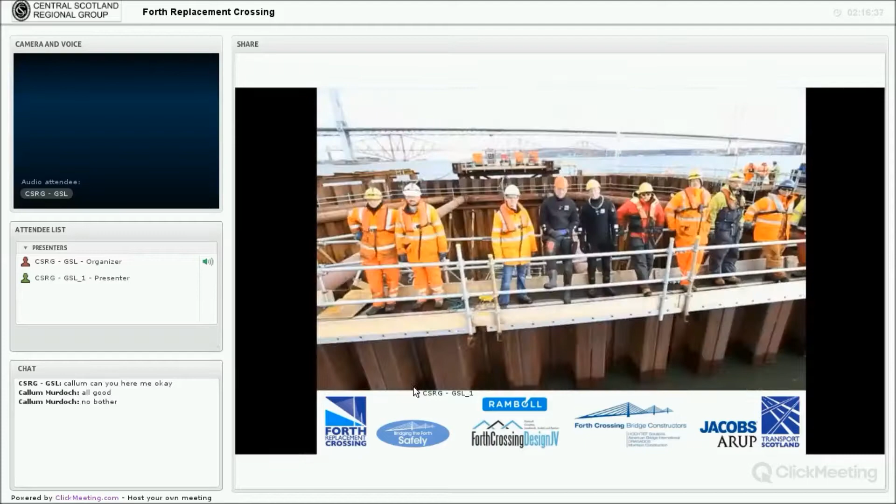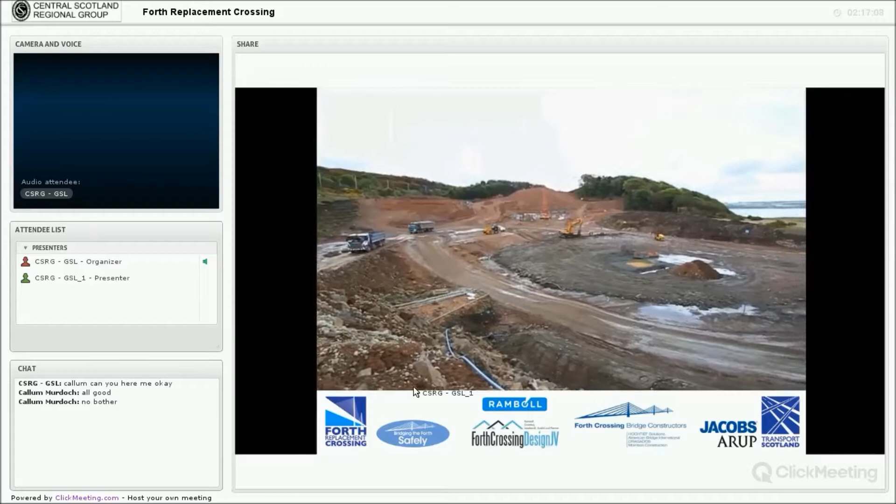Main problems - weather was probably the main problem. A lot of the work so far has been controlled by cranes, so any wind, and even access, affects things. We've had a lot of access situations where we have to use a man-riding basket on a crane, and that completely cancels work if the wind gets above 7 meters per second, or 12 for the cranes, but if you're man-riding it's a lower threshold. Because of where we are in the Firth of Forth, it's a narrow point of the river, that's why the bridges are there. So it's a natural funnel for the wind, and the wind speeds pick up as they come in from Grangemouth, mostly the westerlies, so it's a difficult area for wind.

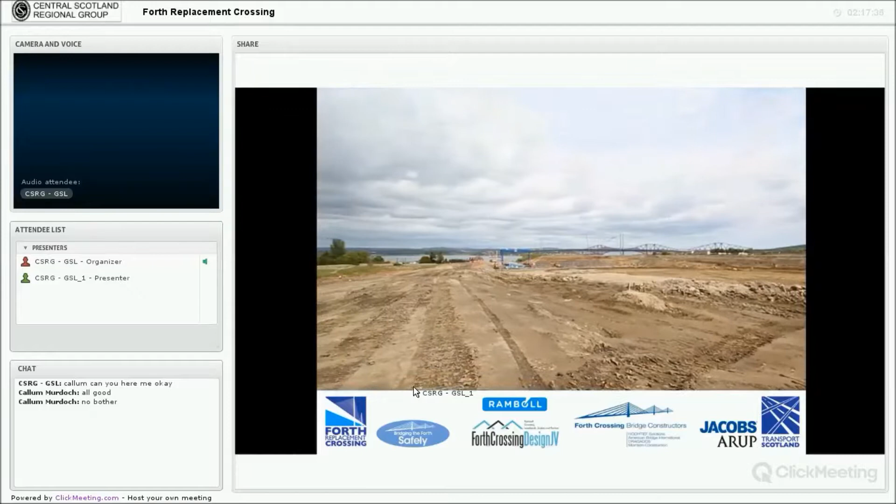From a formation inspection point of view, liaising with the divers, it was quite difficult to start. A lot of these commercial divers dive all the time, however the detail we were asking from their observations - they were used to looking at ship hulls or just very basic general stuff, and we were asking them to look at features they possibly hadn't looked at before. So it was quite difficult at the start, because we had to really train them up as geologists in order for them to get the information from the client. I think that was quite testing.

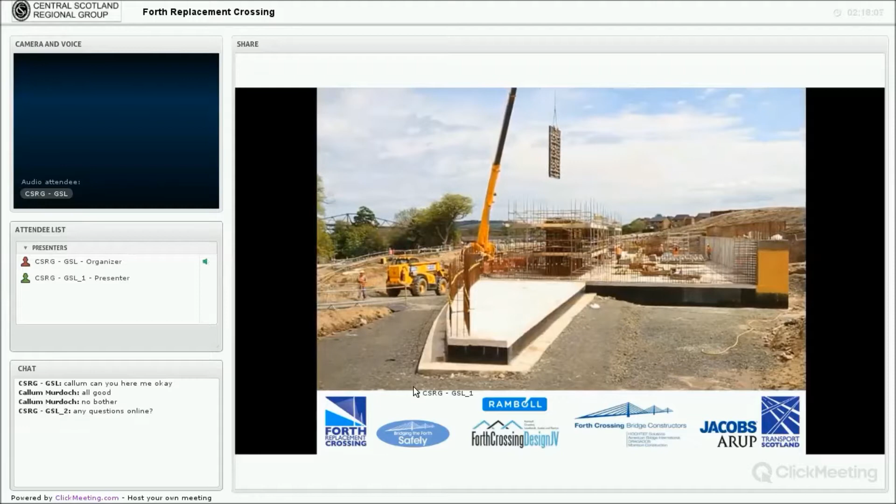Also the contractors, the various guys involved in cleaning and preparation of the land and marine formations - a lot of them hadn't worked on a project before where such a level of cleanliness was required. They would present the formation to us saying, well, that's okay. We'd say, no, it's not okay, go back and clean it some more. We'd look at it again and say, no, it's still not okay. It really needed to be immaculate so that we could be satisfied that the massive loads and forces being transferred through those foundations could be adequately transferred to the rock, and that all the design criteria were met.

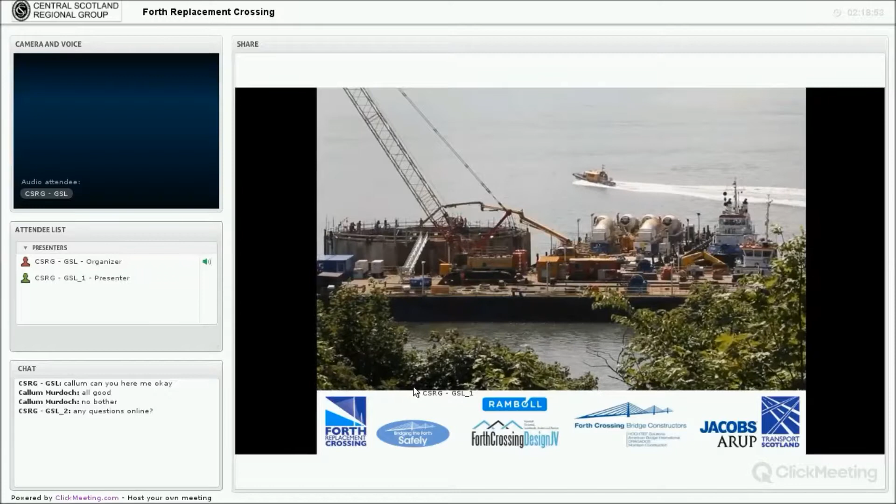We do try, although we're opposing parties in terms of the contract, to have a lot of collaborative working and try to resolve issues early on, because what we don't want to do is stand in the way of the contractor's progress. So if we can work informally to resolve problems, which can then be sorted out formally through the contractual processes once we have a solution, I think we're reaping some benefits from that. But it took a while for the relationships to really gel.

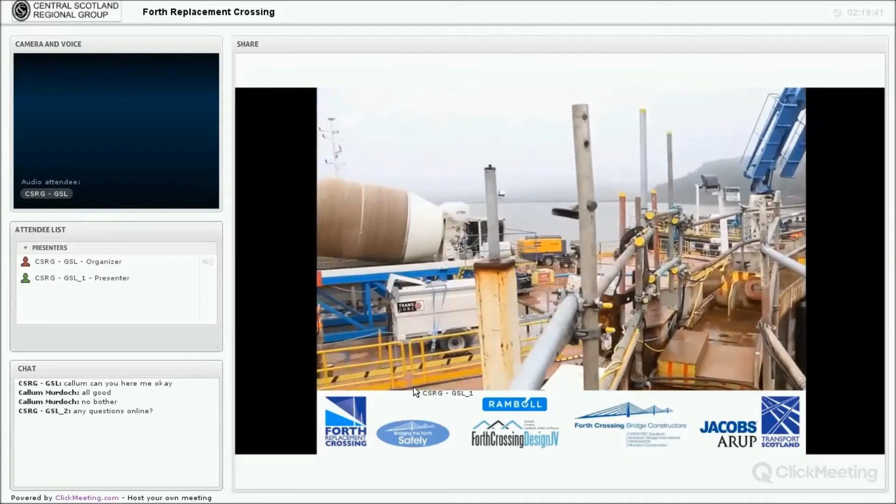It was broadly specified at the very beginning in the employer's requirements. Categories of work were set out where trials would be required. Basically, ground improvement was one of them, which covers a large number of techniques including jet grouting. But we specifically mentioned blasting, and we specifically mentioned the underwater formation inspections. So there were specific areas that we wanted to be trialled. It was having established what areas the employer wanted trialled.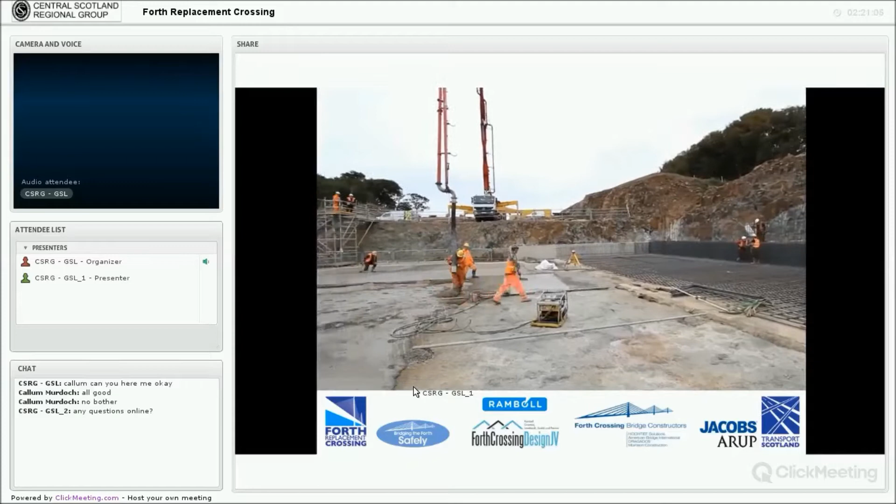It was a case of Ramboll and FCBC coming forward with proposals, and then we would challenge them to ensure that the employer was getting something that gave him the assurance he was looking for, which is something very difficult to write down from the beginning, but emerged from the discussions. A lot of these discussions took place informally initially until it gelled to a sufficient degree that there could be formal exchanges of documentation, to try and avoid them submitting something formally which we would reject because we weren't happy with it, and send it back again. So we tried to work together to come to an understanding as to how the contractor and designer were going to resolve the trial situation, and that we were comfortable with it, and then that was a case of yes, go ahead and do it.

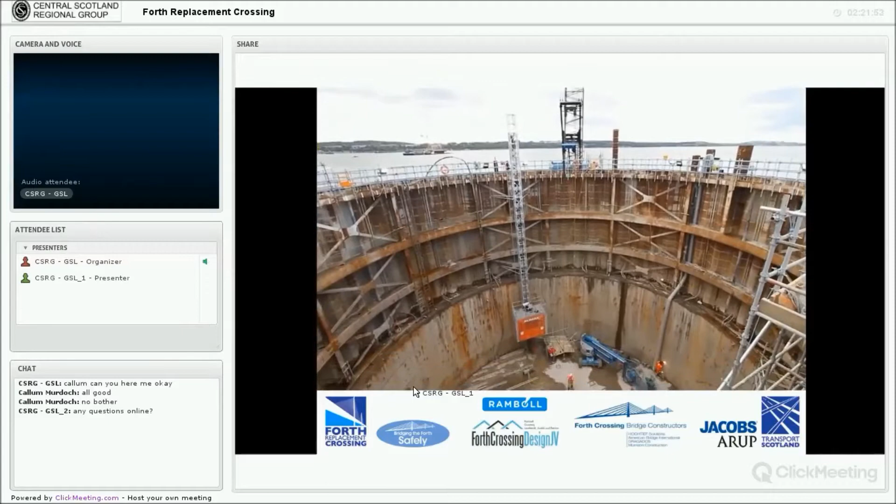But we don't specify precisely what we want - we challenge them till they produce what we want. We just have to keep guessing till we get it right. Well, that's part of the conversation, is to try and articulate what we're trying to achieve from this. So there's quite a lot of dialogue involved.

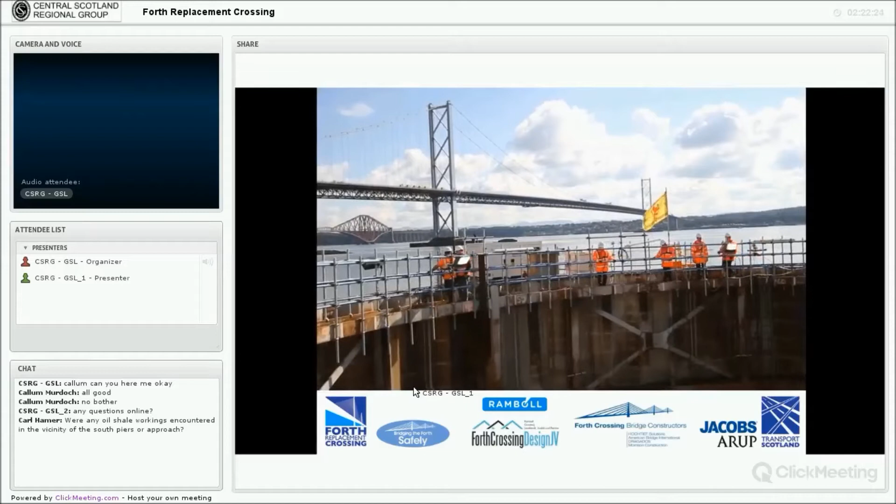Sorry, Jim - yeah, well, I was just going to say that when we were writing the contract documents and the employer's requirements, we had to foresee what trials we may require. We didn't know exactly what the detailed design was. There could have been piled foundations throughout, or there could have been something completely different. So, of course.

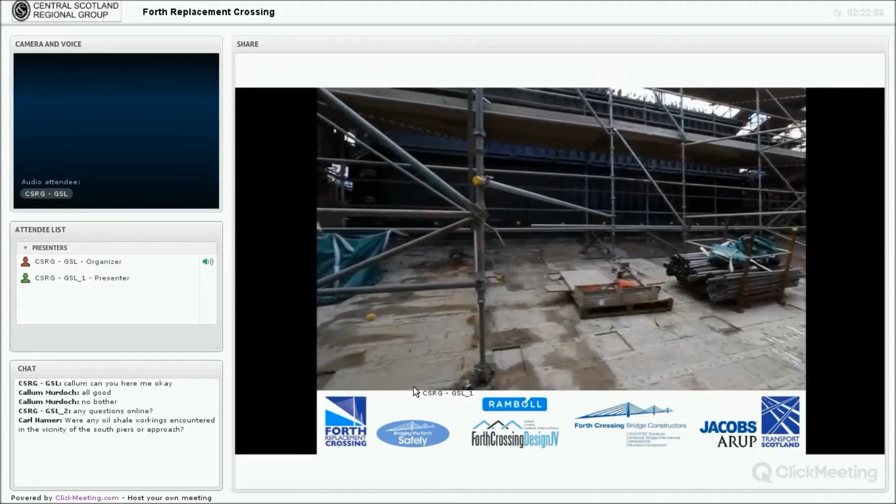Well, we don't change it - we would set out that we want a trial of these particular things. So their contractor certainly had to have in his mind what trials he was going to have to carry out, and make a sensible estimate of the cost of that, and put that in. In point of fact, it may be that the contractor was wanting to carry out a lot of these trials anyway, just to give himself confidence that he could achieve what he was setting out to do. So I have no doubt that we didn't push them into a lot of these trials - they would have undertaken them to their own satisfaction anyway. But it was just a case of not just the contractor's satisfaction, but also the employer's satisfaction.

Question at the back: what was the design bearing pressure at founding level? Have you got a particular point, or just the maximum?

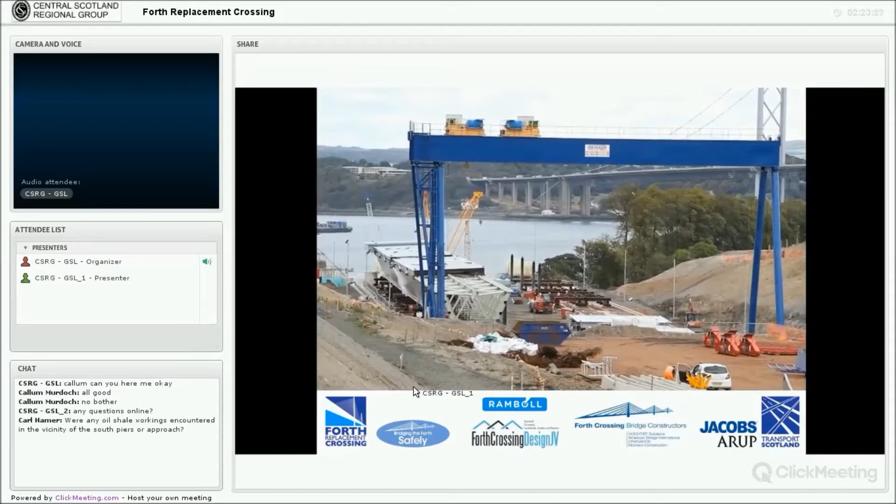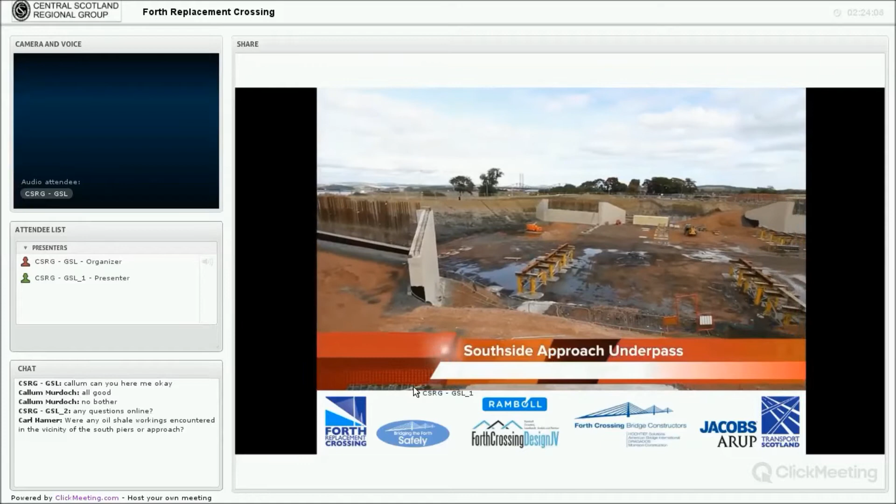The loading situation is quite complex, so I'm reluctant to just quote a figure. In some cases, the foundation was designed for the temporary situation rather than the working or permanent situation. I'm afraid we deleted that slide from this presentation, and we wrote down the answer but have forgotten it. Sorry, we can get some figures and add it to the record.

That was a question about the issue of shallow gas, yes, in the sediments particularly, or?

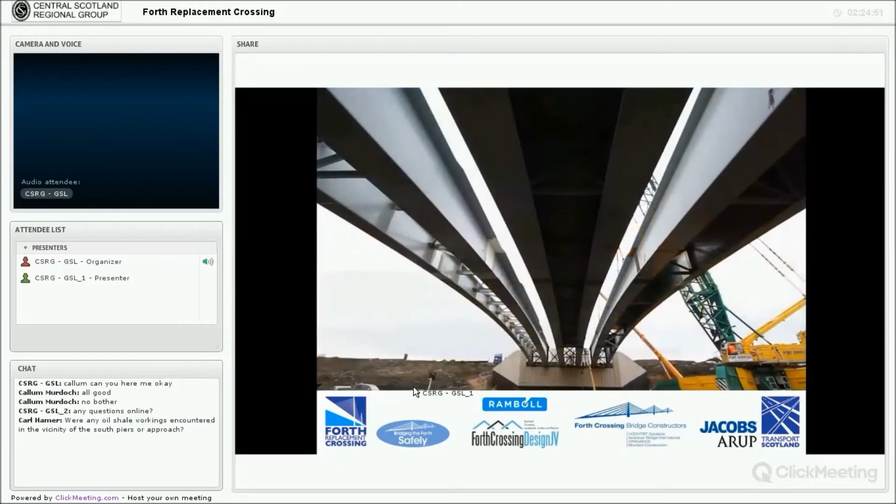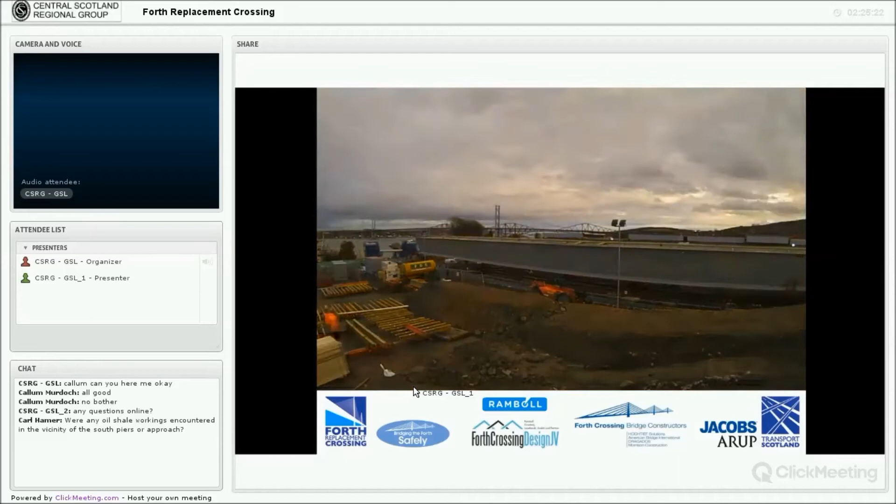I think there are two aspects there. There's gas in the alluvial sediments, and we encountered this very early on when we did bathymetric surveys and tried to do some geophysics to pick up the rock head. We found there was gas blanking due to gas present in the alluvial sediment. So we knew that was there, and it was built into the risk assessments, but it never actually emerged as a live risk. We were aware of it, but there was no evidence it was going to pose an actual risk to the works as the design developed.

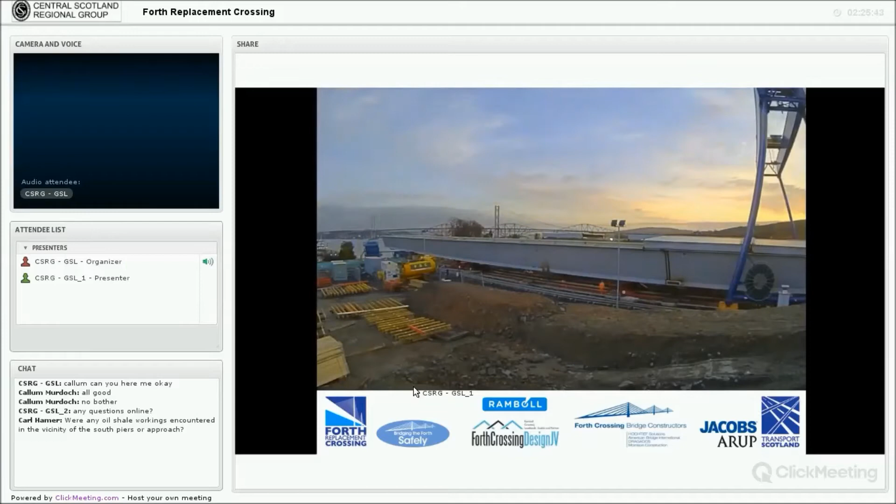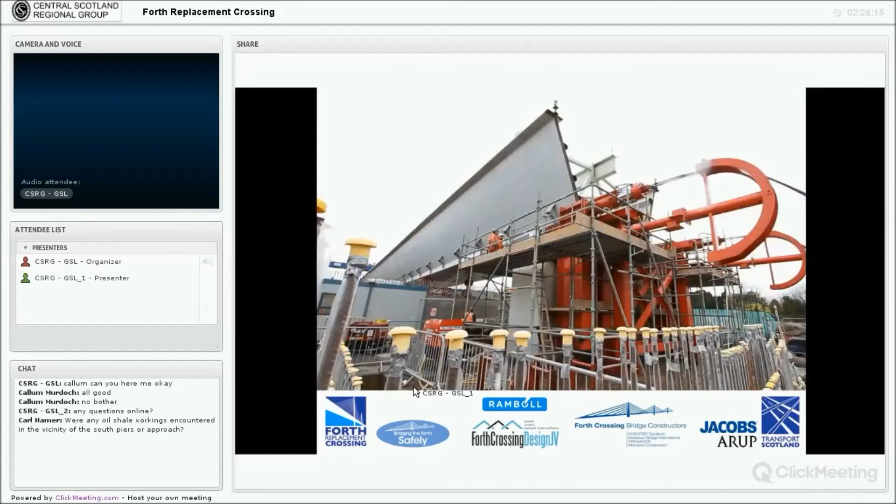Secondly, gas was also discovered on the south side of the south abutment, which we believe was emerging from the rock, probably from oil shale seams at depth, because on the south side of the river there are oil shales, and on the north side, coals. A risk assessment was done, and there was some change to the design of the south abutment itself. The method statements for construction of those excavations took into account the possibility of gas, so we had gas measuring equipment available should it have proved a problem. The measurements from the boreholes were analysed, and yes, there's gas there, but given they were working in open excavations, the risk was assessed out. But certainly, yes, there was gas detected.

Anyone else in the room? No takers? Okay, I think we do have a question from our participants online.

The question is similar: were any oil shale workings encountered in the vicinity of the South Piers or the approach? Workings, no. Oil shales, yes. The sills that intruded the area generally distilled off the hydrocarbon content of the shale—I think it's the Fells shale that we have on site—and it was really just driven off, so there wouldn't have been any advantage working those shales.

Oil shales were encountered in the ground investigation on the southern approach roadworks, to the southeast of Queensferry, where the new M9 spur was constructed, and grouting works had to be undertaken when that was built a few years ago for the structure where the A90 goes onto the M9 spur. That structure was grouted up, but our scheme starts immediately to the west of that, and the shale seams were dipping away, and the depth was such that no grouting works were required for our project. So we did encounter oil shales that had been worked, but that was at the very southeastern extremity of the project, and apart from that we've had no mineral working.

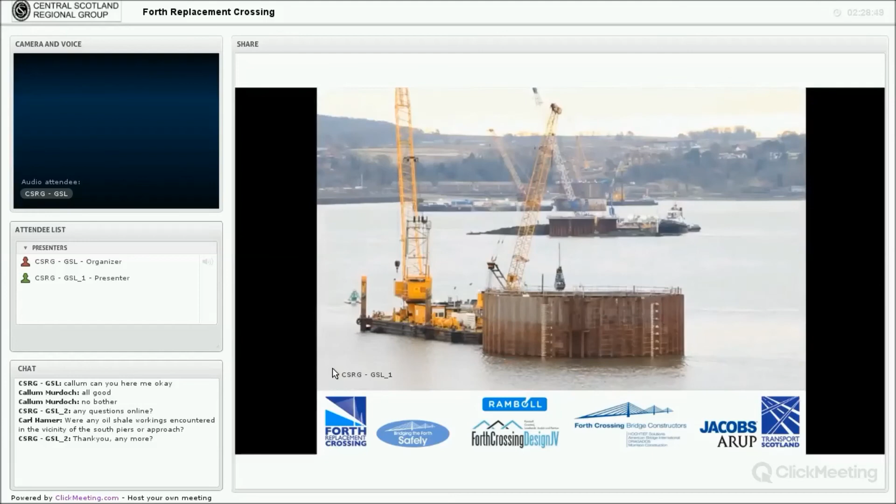I have to say, to the extreme north, we did encounter some coal workings which had to be grouted. So when we were doing improvements to the M90, the approach to the new crossing, we did grouting works there to improve that. So yes, mine workings were encountered, but not, as John's pointed out, under the main crossing, because of the effect of those dolerite sills.